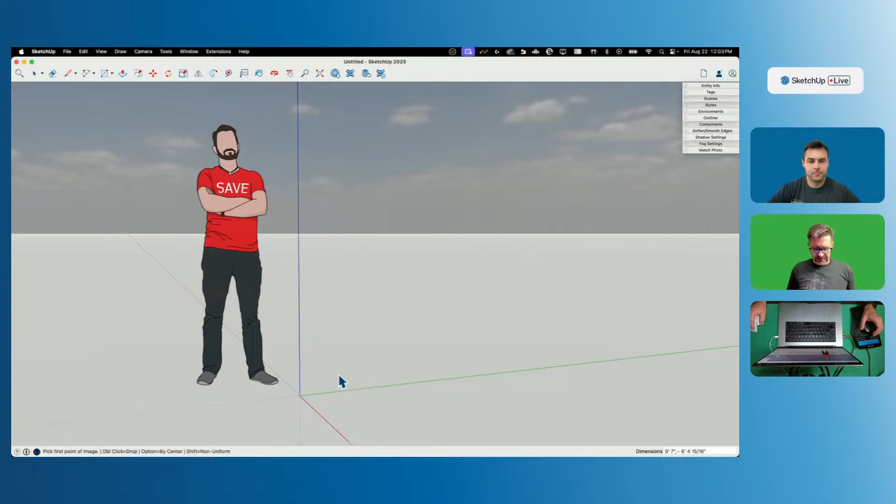All right, here we are. I grabbed a couple of images of this that I think we're going to try to use. Let me drop one of these in here on the screen so we can take a look at it together. This is the building we're talking about. You can see why it was so exciting to go, oh yeah, let's model that thing.

We've got these big—I don't know if they're timber arches kind of coming up here. We've got stonework that goes over here, these big multi-laminated members here. It's just a really cool structure, really unique, really just begs to be in SketchUp in my opinion. It just wants to be modeled.

Normally the sky isn't this white in Nebraska—just so everybody knows, this is the result of Aaron's environment that he has on, but we can turn this off temporarily. There we go, that looks more like it.

This is interesting because normally we would look at this from an elevation perspective or maybe even a section and try to figure out how we're going to trace this. But because we don't have any of those things, we're kind of flying blind here.

And so I'm wondering, Aaron, how are you going to approach this? Are you going to do a basic shape first, or what's your thought?

Yeah, so there's a couple things we could do. We could jump in without thinking, which is a tactic I'm a fan of. But I think we might pump the brakes for just half a second.

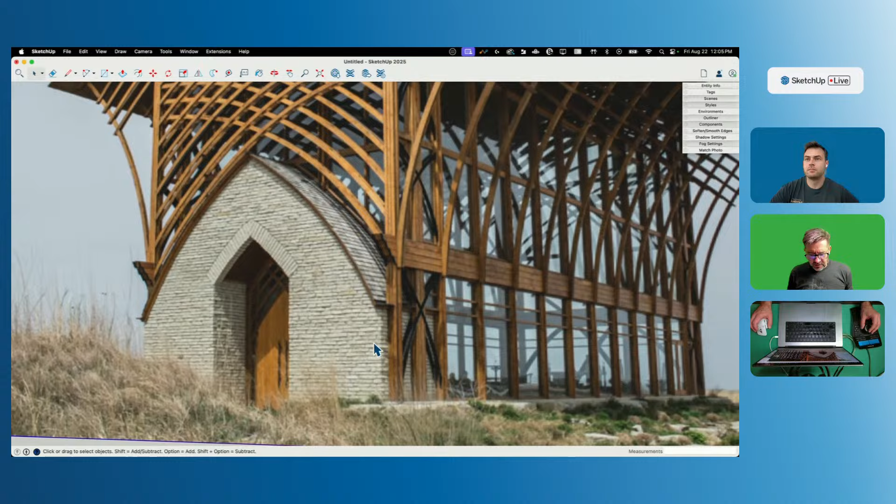So I think what could happen—and we end up skipping out on this step a lot because we don't get good images that would work for this—but I think this image may actually be a good one to give a shot at a match photo.

Because I feel like we have parallel vanishing points. If I look at this line right here and this line right here, they're going the same direction toward each other. Over here, I don't have distinct lines, but I could pull a line from this point at the end of the overhang to this end of the overhang, and then from here over to here, and that would give me two points going the other direction.

So I think I could do a match photo with this. I probably wouldn't do a whole lot of actual modeling in the match photo, but I think I could do enough to get, like I said, this initial box right here.

So here's the side, kind of goes like that, goes like that, goes like that. To get that in there, maybe reference where this part is. So I could do enough that we get the approximate shapes and relative values right away.

So I'm going to give that a shot, we're going to try it. Yeah, match photo is a good call.

And I have the basic dimensions listed out here for you, so as soon as you have a shape you feel comfortable with, we can get everything to an appropriate size. Perfect. Yeah, so we'll talk through what that process is like right now.

So I'm going to go to import. I believe it is this one right here. I'm going to import it as a new match photo. Hit import. This is what match photo gives me. Whoops.

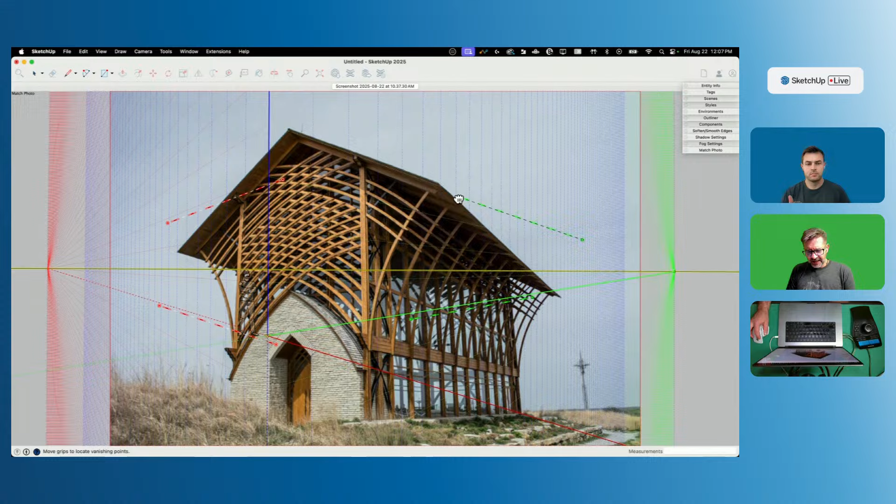So I'm going to take my greens and line them up with one set of parallel lines that vanish, so like that. And I'll grab the other one right here, we'll go right at the bottom of this beam right here.

There you go. One thing that's nice about this photo is it looks like it's just a pure photo that's been taken straight on from this thing. It doesn't look like there's any type of warping happening, which is nice because it kind of lets you trust the match photo a little bit more, I think.

I think you're absolutely right. It's one of the things you see especially with tall buildings, because tall buildings don't fit into viewfinders very well—they're just not made for that, they're big. So a lot of times when you look at skyscrapers, either because of the lens they use or post-processing, we don't have good solid parallel lines. This one, however, worked pretty good.

So I'm going to take my origin now, and drop it right at the bottom of this beam right here, which is where I think that column goes all the way up, and that's where that inside glass is. So by putting my blue line here, I can see does that pretty closely match? And it does—it does a pretty good job of matching up with that vertical line.

I can see right here that 2D Aaron—so a lot of times people ask, why do you have those 2D figures in every model?

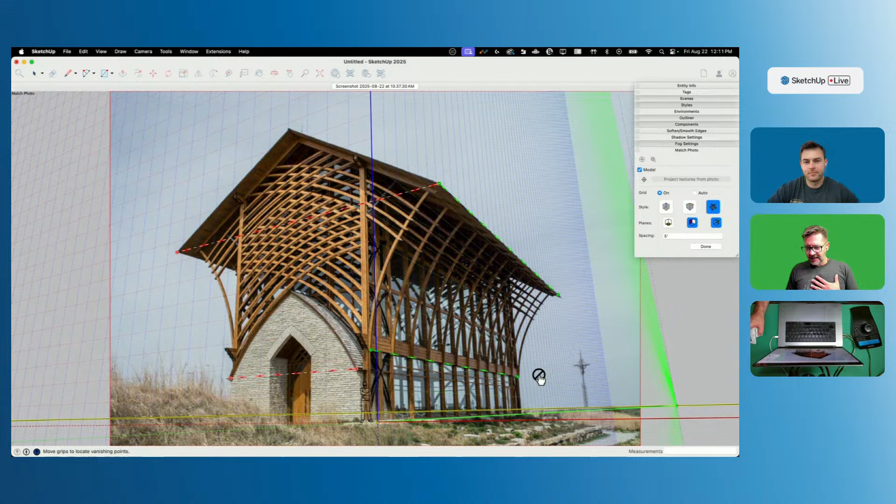Yeah. All right. At this point, I got my lines in, my red lines, my green lines. I'm going to go ahead and hit done. All right, and now we're in here. We have this. And what I'm going to do is start right here at the origin. I'm going to draw a line all the way back to here. And I'm going to take it up to here. I'm going to come across this line. Went a little bit too high, and I'm going to bring it back down. All right, there we go. So I'm going to grab that, move it vertically, just a little bit.

Try to line it with, I have this little teeny line of reflection I can see right here. All right, I'm going to take that straight across the red axis till I get to there. I went too far. All right, but again, I'll fix that. No, actually, let's do this. Let's just pull this through till it hits right there. There's that line and back. So that's about where the bulk of that glass frame is at.

I'm going to do one more thing. I'm going to pull this out on the red axis to this corner right here. I'm going to go straight up from there to here, take that across to here, drop that back down to the origin. That gives me a rectangle. Let's go here straight up. Arc from here to here.

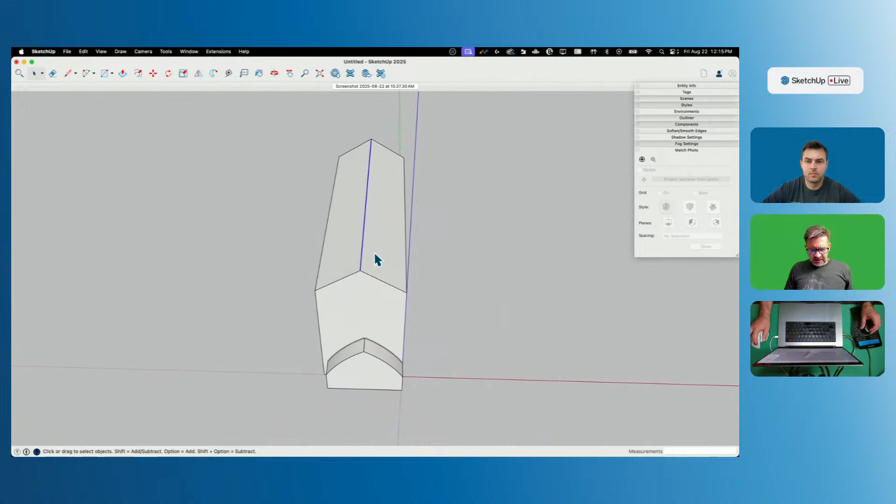So what I can do is I can pre-select. I can highlight right now, and when it's highlighted, jump back into the scene. And now I can just go to move and move it vertically, even though I can't see where it is. And that works just perfectly. All right, so it looks like that is parallel right there. That looks pretty good. I'm going to triple click that and make that into a new group right now. Nice. So this thing, I should probably save, huh? Yeah, I think so. Save.

John Ross asks, are you going to do half the building? So I'm thinking maybe modeling half the size and then just flip the half of the building and then flip a component over to the other side? Or are you going to model the individual trusses and then array them? What's your approach here? That is an excellent question. Something I don't think about usually till I'm pretty far down the line of modeling. So good question. Thank you so much.

So obviously right here we have these continuous pieces that come across, and you can see the left and right is different because of the way the timbers overlap. So this facade I'll probably do by itself. These pieces down here as they array and the beams that go in front of the glass, I'll probably do that as a component and then copy it over. And then the back half is totally different from the front. So I'll probably model the front as a piece and then the side as a piece and then mirror the side over.

That is a great way to be thinking about stuff like this. If these all melded together, if they weren't obviously one set in front of the other, if these all just came together, then I would say, yeah, let's chop it right down the middle and do half of it. That's a good astute point. Are you ready for some dimensions? Almost. I want to fix this real quick first.

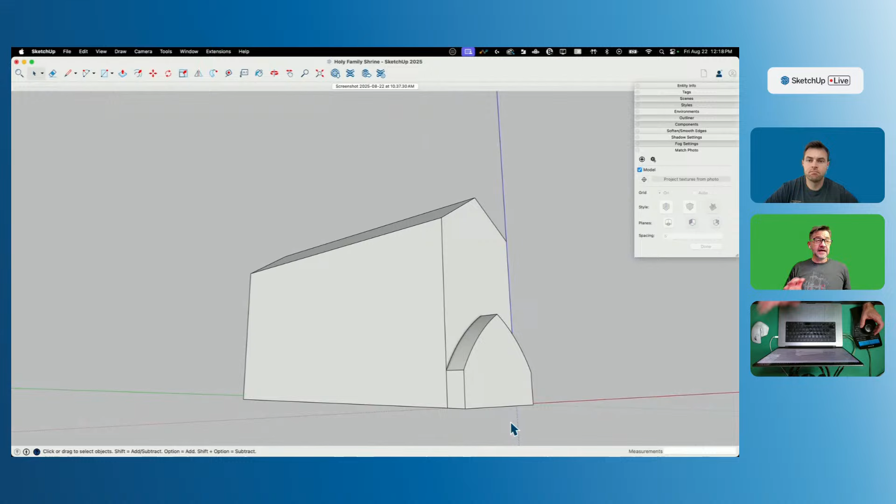If I come over here though, see how it looks like it's slightly off? So I think what I can do is I can double click in and I can pull this back and get close to what I need there. Again, we're not trying to match perfectly. We're just trying to get the general shapes in, and I think that gets me close to where I want to be with that. All right, yes.

So now we're, wait a minute, hold on. Okay, now that's important because we're going to do some scaling now. I want to see how this changes. Yep. So what I'm going to do is I'm going to grab the two pieces that I have, put them into a new group, go into that group, and we'll scale from here.

All right, so what numbers do we have, Justin? Okay, so for the width, we are looking at 26 feet. All right, so let's try this. We'll see how close we are. 28.5. All right. So I'm going to just do a dimension from here to here. Tell it it's 26 feet. Enter. Because I'm inside of a group, it's just going to scale the group and not the whole model.

If the whole model got scaled down, then Aaron would shrink and it would be absolutely terrible. So I'm just going to hit yes. There we go. Cool. So let's see. So we're close there, but yeah. But okay, the screenshot no longer matters at this point. It's just reference. Yeah, now we're flying wild.

The length is 80 feet. 77. Oh wait, no, hold up. 81 and 1/4. That's pretty close. So I'll come in here. I'll just push-pull this back right there.

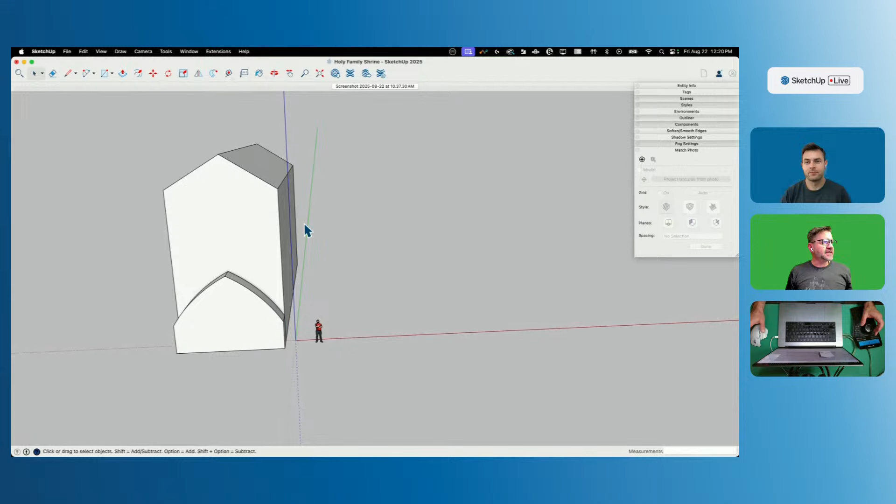So yeah, Johnny pointed out that we could go in and adjust the match photo to make it all line up perfect, and we could do that. I'm not gonna. I absolutely could, but there's not a whole lot more I want to pull off the match photo at this point. At this point, I want to grab a couple more images I have and bring them in here and use these to model from.

So we're gonna use this in a couple different ways. I got this one right here, and this one right here, which are good front and side views that I think I can model off of. So this one right here is perfect for getting these wood shapes that are gonna repeat the whole way down. So if I get this arc and these pieces right here, that's gonna be all the way down the side of this model. This of course is that very decorative front end.

And then here on the sides, we can see what pieces are here to repeat. Yeah, so that'll be good to get all that stuff in from these images right here. So like I said, a little less worried at this point about the match photo that we started from.

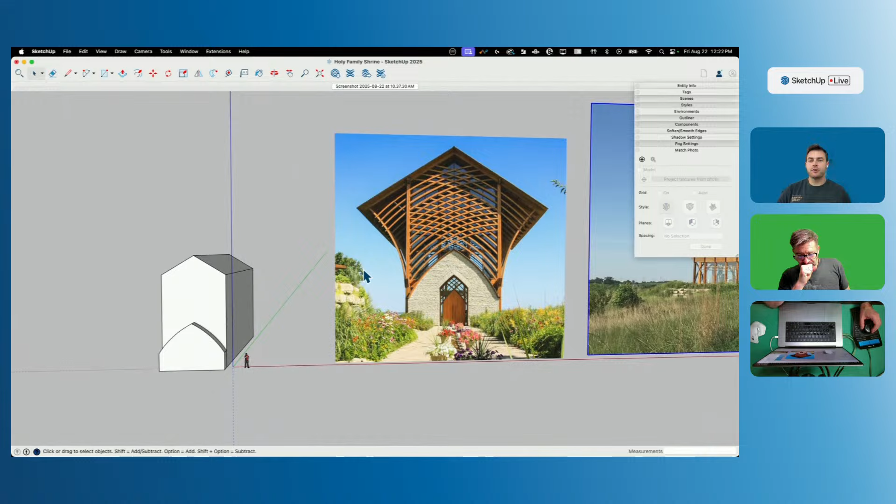And are you going to wing those arcs, or are you going to trace the photo? Well, see, here's the thing. We established that arc through the match photo with this, because these arcs offset off of this roof we did right here. So this is actually that same arc, offset, offset, offset, etc.

The question that I have right now that we need to figure out is how far apart are these things? So there's a couple ways I could go about figuring that out. One is I could scale this drawing to this size and then just start doing it. I could offset 13 times, and then scale those 13 lines so the last one comes right about here.

Or, since I have this nice, clean, square front view, I could take this and put this onto the front of this mass that I have right now and work off of that. So I think I'm going to try that. I don't know if it's going to work, but I like to try different ways to do stuff for you guys. So we're going to give that a shot.

So right now this is an image, so I can't paste an image onto a surface. What I have to do is right click and say explode. When you explode an image, you create a surface with a material on it. That material is that image. So that's what I got now. So now I can come in here and I can say paint bucket, grab this, put it right here.

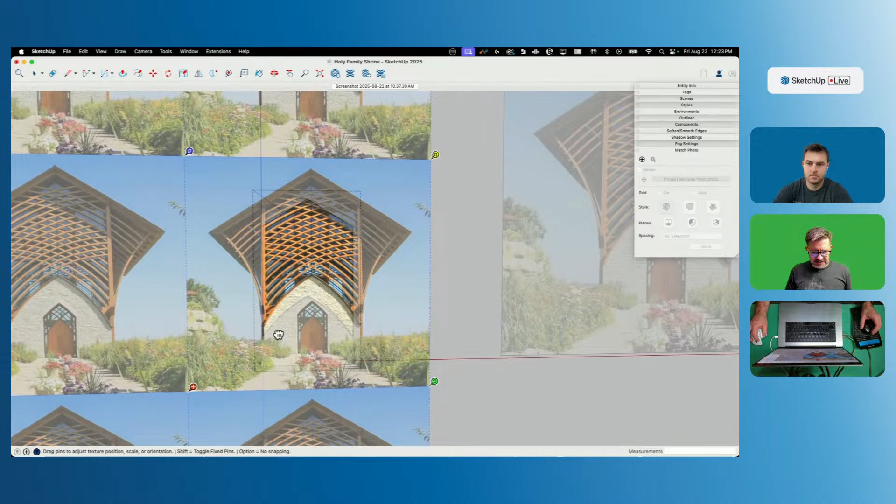And then I can say, okay, now texture, position. And I don't want to distort this at all. I just want to make it smaller. So I'm just going to start dragging it like this, slide over. This is not precision modeling at this point. This is kind of just getting stuff where I need it to be so I can reference it. So if I slide that, that's pretty close. A little bit bigger. Yeah, that looks great. All right.

All right, so this picture is not perfectly square. I'm seeing some distortion because I'm taking this line and trying to line it straight up, and that's working, but I can see that that's not perfectly aligned down here, but that's okay. This is gonna get us close. So I'm gonna go ahead and hit enter. Now, again, this is temporary. This is just to get some geometry off of here. We're not gonna keep this here. These ribs actually sit out away from that front glass right here, you can see. So I'm just using this as reference.

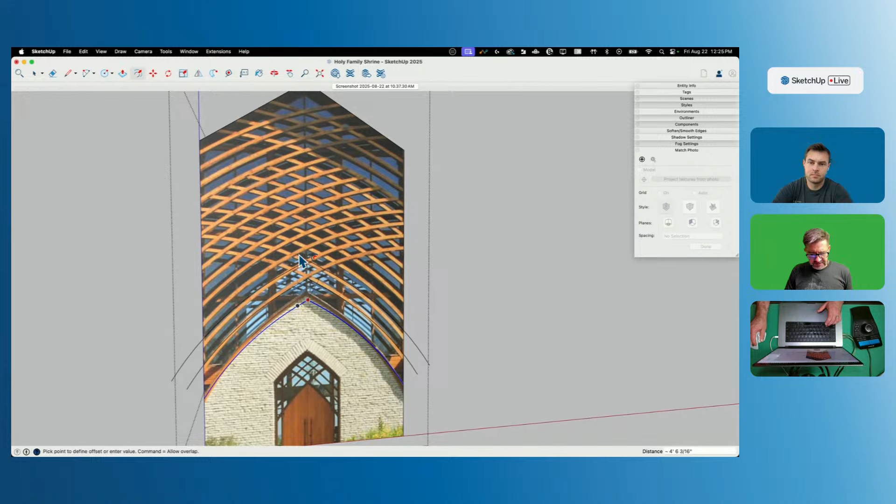So I'm going to use offset. Actually, I got to go in here and get this. I'm going to grab this line right here. Actually, I wonder if I should do both. I'll grab both these lines. I will copy them, and then I'll come in here into context, and I'm going to hide everything else in the model, and edit, paste in place. Now I can say, oops, offset from here to here, from here to here. Yeah, I see that the distortion's bugging me already. I'm going to say 12x.

Oops. Offset from here to here, 12x. Oh, I'm sorry, asterisk 12. All right. Undo, undo, undo. All right, grab these two. We're going to try again. Offset here, 12, asterisk, enter. Asterisk 12? What am I doing wrong? All right. Times 12. X12. Nope. Oh boy. It's all falling apart. Why am I having such a hard time here? All right, let's try this again. So I'm going to grab these two. Sometimes Fridays feel like Mondays.

All right, I'm going to offset just this up to here. This first one looks like it might be a little bit different spacing. So then I'm going to grab this one. Offset that up to here. 12x. Enter. I don't know that you can array an offset. I think your better move is just to use the move. Double click. Oh. Yeah. Yep. Yeah. There you go. Brain didn't do its thing it was supposed to do. 1, 2, 3, 4, 5, 6, 7, 8, 9, 10, 11, 12, 13. Okay.

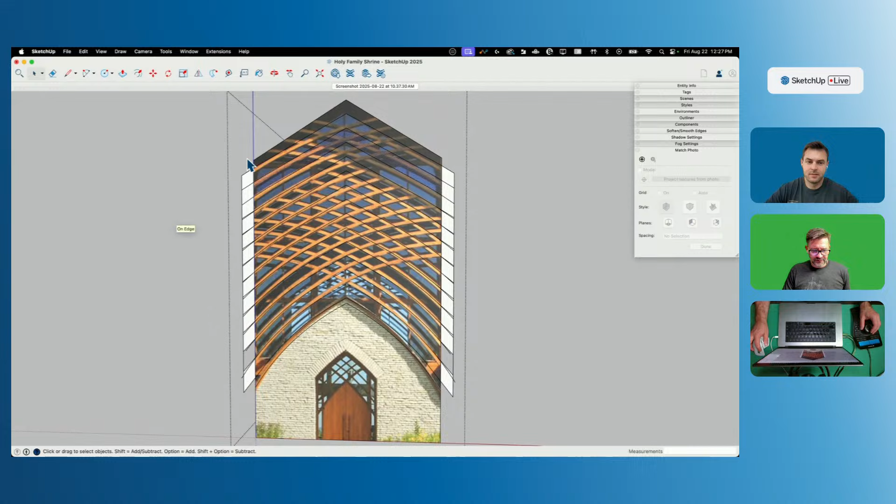Nice. See that, folks? Even the experts. By that I mean Justin. Forgot to tell me that. I'm not the expert. We've got the first pun of the day here. Peter says, right, "These arcs are way over your head," at Aaron. All right. And now, judging on the location of your scale figure, I'd say that's true. Yes. This is good stuff right here.

All right. So I may want to reference this image again, but I got to get it out of the way because there's too many lines right now. So I'm going to go up here to View, and I'm going to go to Face Style, and I'm going to change to Monochrome. Monochrome doesn't remove that, so it's still in there. What is this? What is going on here? Hold on, I got to go back. I guess, yeah, it's tough again because the photo that you're using in elevation is a little distorted. It is. All right, so here I'm going to back up way up. I'm going to grab these two lines and I'm going to use a move.

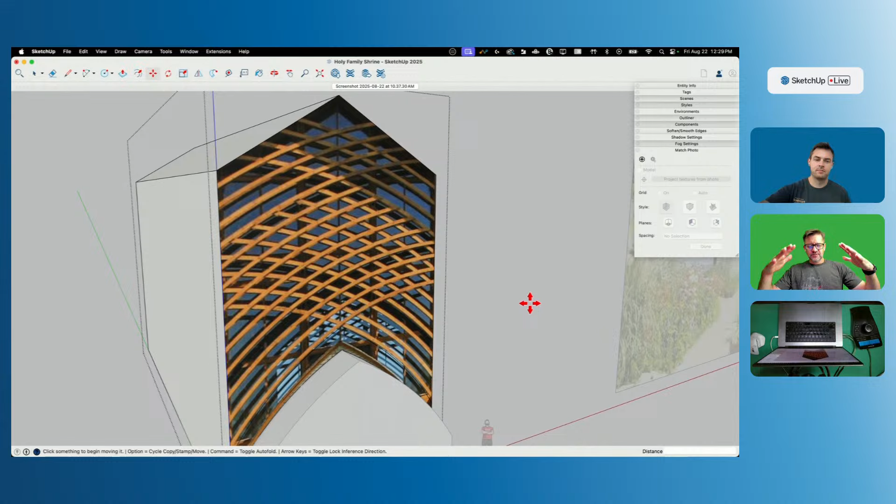Option move up this one, and that's going to say 12x. So I was curious about this. So you can see that I can't use a move because, oops, that's not what I want to do. Because it does actually grow. So the arc of this piece is different from the arc of this piece. Is that a true statement? I'm questioning how I'm doing things. So apologize for 1 second. Indulge me for a moment, if you will.

Here's what I want to try to do. All right, so I need to turn back to monochrome. So if I take this line, I'm going to grab an arc, and I want to continue that line out. There we go. So that's tangent. So if I take these two lines, weld them. Now if I go back, I think I want to grab this and put it into a group.

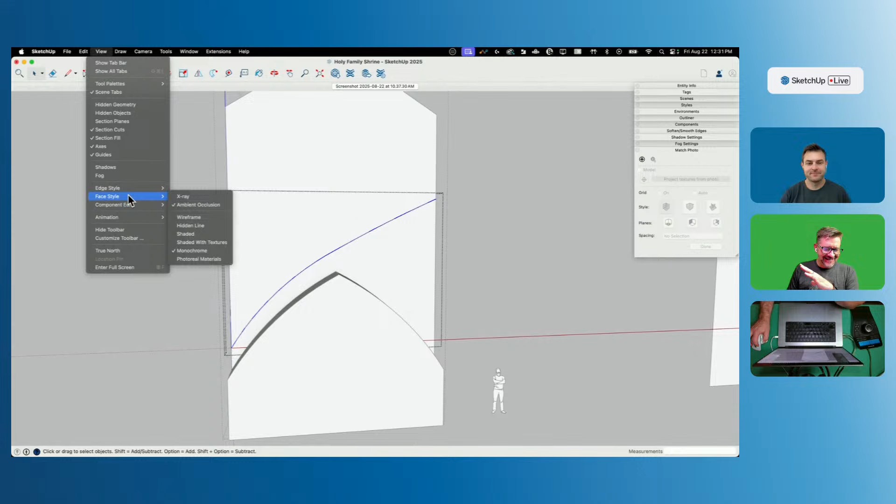I feel like this arc is really throwing you for a loop here. Well, I got to figure it out once, and then I'm good to go. Right. It's crucial though, the point of the whole stream. This arc. No, I think we're there now. I think now that I got to this point, I had to do that for a sec. Okay, so that arc's not quite right. So I'm gonna go ahead and get rid of the arc from here on over. Would you consider just drawing the arc from scratch?

Yeah, so I'm gonna just come here and then pull that up to about where I think that should be, and then we'll grab all of that and say weld. And now I'm going to take that and offset that here. I can double click. Okay, this is way better than what we had before. Nice. We're closer. Again, still some distortion, which makes sense because if you think about being down looking up like this, stuff that's farther away is going to look like it's closer together than it actually is.

So that makes sense. So 1, 2, 3, 4, 5, 6, 7, 8, 9, 10, 11, 12. So one more. It was a little bit too tall. So since these are all in a group together, I can grab them all and scale them down just a skosh like that. This way just a teeny bit.

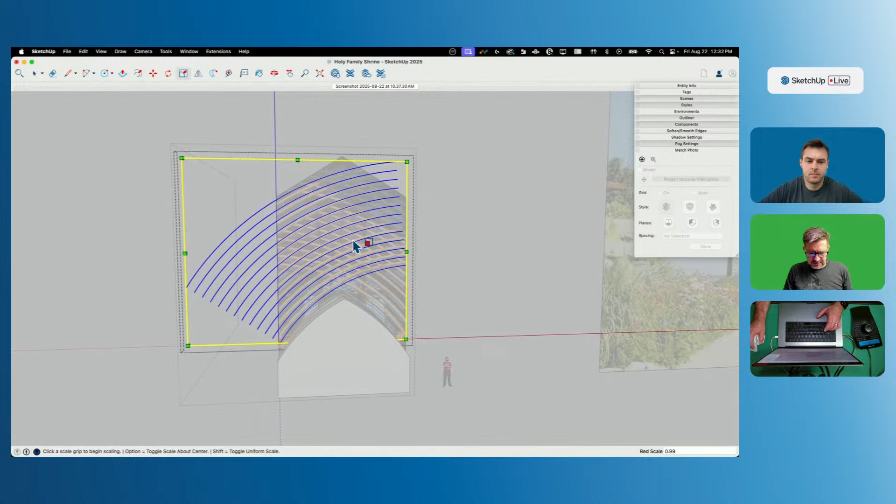So I do have to... Some of these ended up a little bit short, which I think is not a problem because I should be able to just go to arc, grab the end here like this, and then, oh, whoops, I'm out of context. All right, there we go. I go here and I carry that out like that. Nice. Fortunately, it is repetitive.

But yeah. You know, this type of modeling, sometimes the repetitive stuff, it's good for the soul. Well, it's reality, right? Sooner or later, stuff repeats, and you maybe don't have the exact tool you need to make it happen. Right. Oh, I'm still going now. Stop! For gosh sakes. Okay.

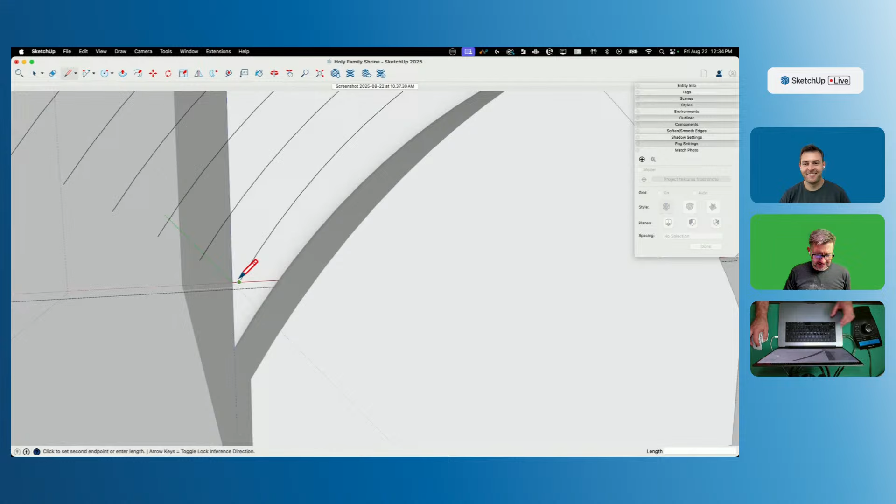Looks like the bottom one doesn't go all the way through on the left. You're right. This is so small. I'm just going to put a segment like that. There we go. And we'll weld that. And then each of these just double click or triple click, weld. Actually, I think I can do this all at once. If I just grab all of that and right click and say weld, is that going to just do the first one or all of them? Let's see. There you go. It did all of them. Cool. Time saver.

All right. Almost there. The last thing I need to do is give them some depth. So again, one at a time, I'm going to offset, I'm going to say 4 inches. And then I'm just going to double click and do that to each of these real quick. Is there a group offset? Is there an extension that'll let me offset a bunch of edges? Oh, whoops. Oh no. Let's see.

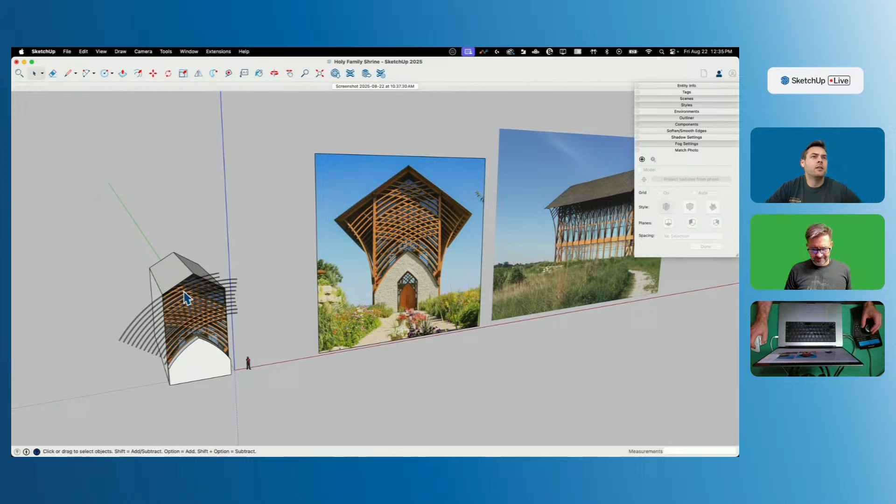It does look like maybe there's an extension called multiple offsets. That would be interesting to play around with. Yeah.

All right, so now I need to get these cleaned up. This is still in its own group, so I'm going to come in here, chop these, and get rid of this extra geometry.

Okay, I don't know what I just did before. Get rid of these. Sometimes problems happen and you can investigate, or you can just go, all right, I ended up in the right place, so let's move on. Why didn't that cut that? It's cutting a few each time. I must just be slightly out of plane, maybe. I don't know what that was. That wasn't good.

You're close, almost there. What is going on? Okay, there we go. These ones over here, the top 1, 2, 3, 4 carry on, so I want to skip 1, 2, 3, 4. Start my edge here, that, and then...

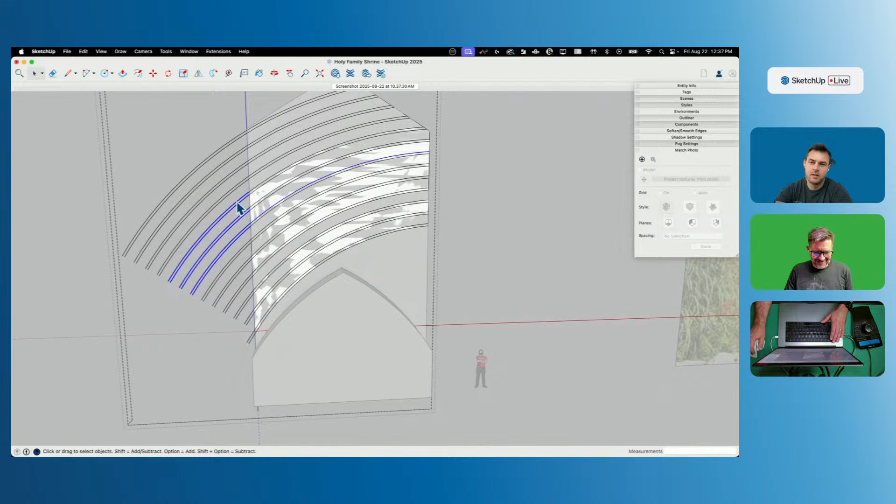I don't know what's happening. Oh, Aaron. Some things should be easy, and I don't know, man. Oh, it's a good time. It's a good time, if nothing else.

Don't worry, folks, next week we'll go back to modeling spaceships. Yeah, this geometry, this building is just too hard. I need some simple 3D curves and mesh to mess with.

All right, let's get rid of some of these surfaces. Oops. Woo! All right, we're here. We've made it here. This is a good spot to be. I like that we're here. All right.

Now, oh, I should close these up too. Sorry, let me come back in here. That one, ooh, it turned white. That is a good sign, that means something's closing up, and I like that. All right, let's hide the rest of the model and see. All right, looks pretty good. We can get rid of some extra edges here. Whoops.

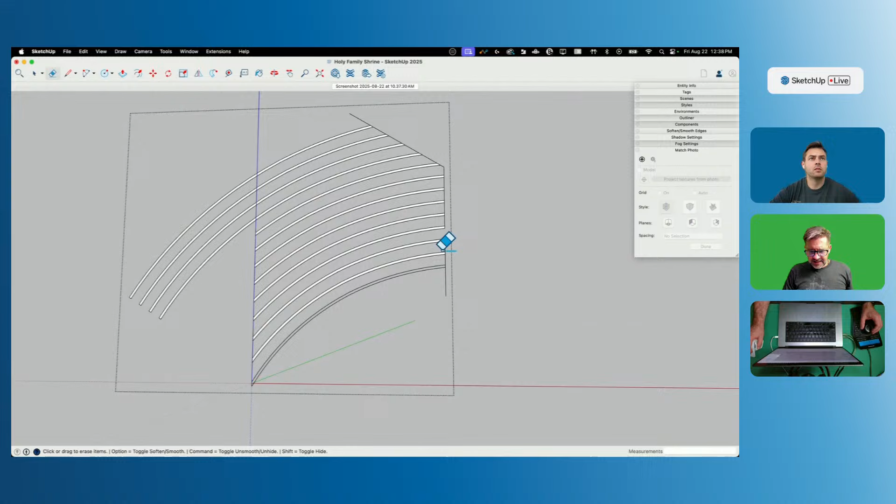Okay, so let's say, hypothetically, a learning opportunity presents itself. Oh, there's my problem here. This one wasn't quite long enough. How about that? There we go.

I hit this every once in a while, where I have an edge drawn on the blue axis, and because the blue axis is so dark, I can't tell where I have edges and where I don't. I don't want to necessarily move my model away from the axes, so what I could do is temporarily just move the axes over. So I can go to Tools, Axes, and put it right here. And then now I can see, okay, there's those segments I missed, couldn't see them before. You can also temporarily just turn off the axes in your styles.

And then I can right click and say reset. Oh, and I went back over there. All right, so that's pretty good.

That's looking good. Before I extrude it out in 3D, you do notice that these ones coming this way stop at this one right here, the first one that goes on the overhang the other side. So what I'm going to do is take this and make it into a component.

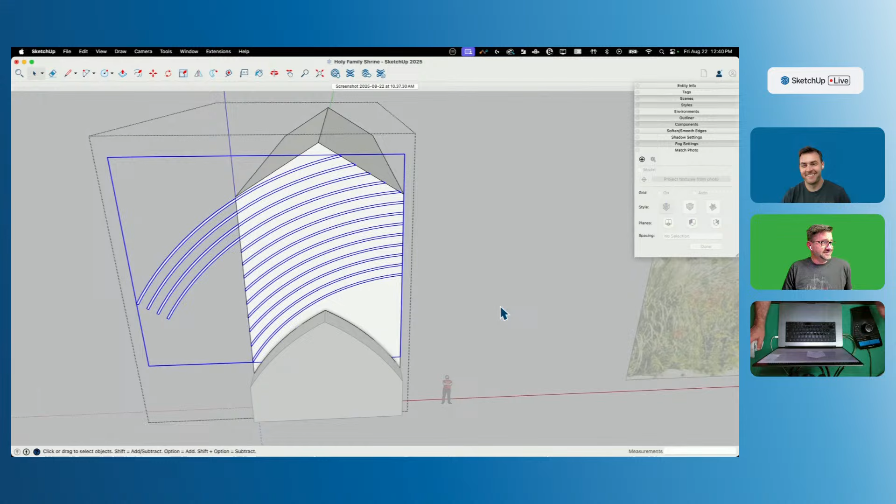I'm going to call these the front ribs. Because, yeah, right, why not? I'm going to take that, and I'm going to mirror a copy along this ridge right here. All right, so there we go.

Looks good. Now what I want to do is, let's see how best to do this. Here's what I'm going to do. I'm going to come in here, grab this edge right here, and copy it. Now I'm going to come into this one. I need to change my view because I don't want to see both of these, so I'm going to hide similar components. I'm going to say edit, paste in place. All right, now that should allow me to get rid of these pieces here on down.

Nice. It's all just geometry. Because in this case I made it a component.

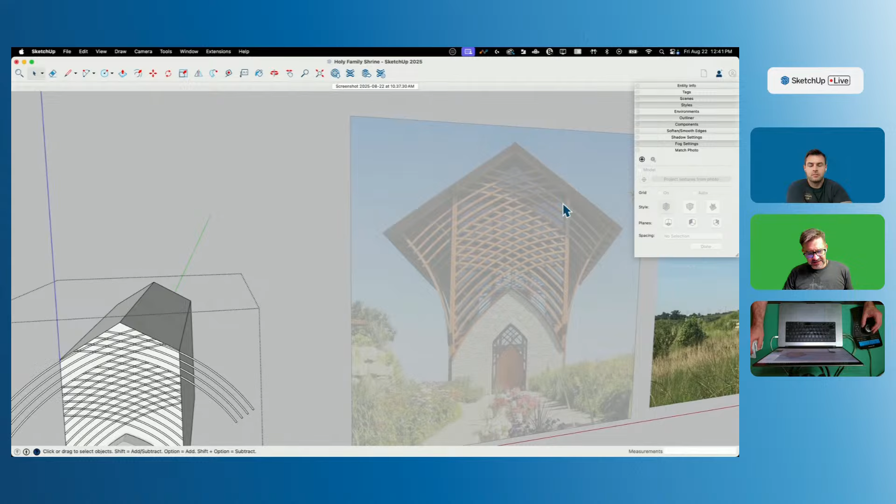That's a good one. Nice, that's looking pretty sweet. Yeah, I'm a little closer on the top here, but I feel like I want a bigger thing here, but I'm going to go with it.

All right, so now what I'm going to do is come in here and pull this piece out. I'm going to make it 4 inches. I don't know if it's square or not, but I'm going to say it is 4 inches. I'm going to double click each of these. This is someplace where joint push pull might help because I could grab all these and do them all at once, but really it's not that big a deal to just click through.

It's good for the soul, you know? Sometimes you just need something to turn your mind off and just double click, click and double click. There we go. All right, so there we go.

Got that. And now this one, we will move forward this way 4 inches. That'll give us our overlap. All right, we got that going.

That looks like it's about halfway back - well, about a third of the way back above this. I'm surprised that before push-pulling, you didn't want to draw that outside arc when everything was flat, the one that intersects the outward top arc. Oh, this one right here? Yeah, that would have been a smart thing to do.

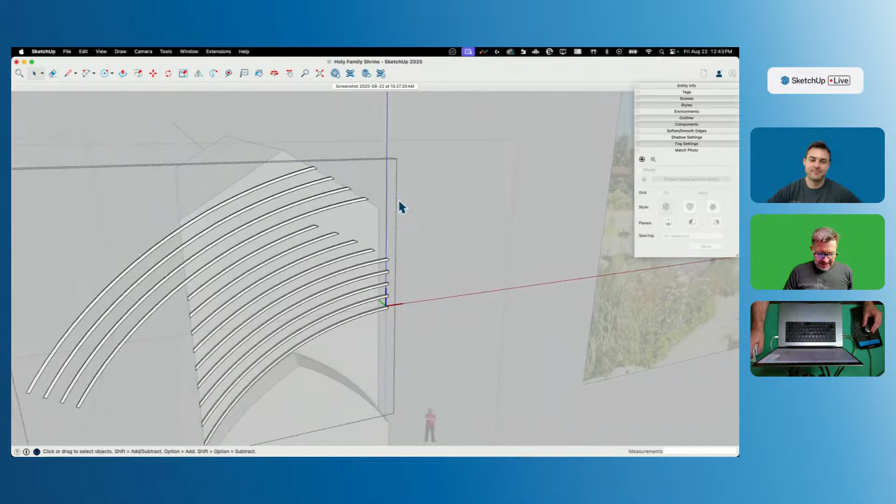Yeah, okay. Control Z, Control Z, Control Z. No, just kidding. We have tools for this. We can fix it. We can do this. We can make it all happen. Look at all this.

My messes are showing up, but that looks pretty cool. So what we have right here, a couple things: we have this big beam that comes in that covers up a portion of this, so I'm gonna do that real quick. Come out here, only 12.

And that's gonna go straight up. I'm just gonna run it long right now. Make a component and call this a side column, rib number 2.

Oh, so many ribs. We'll just take this back like 6 inches, 5 inches. Actually, no, I do want that, because it looks like that first beam is just a little ways back, so I want to make sure I make that happen. Now that I'm looking at this too, I think that'll work. That'll work.

Nice, take those guys back. I want to line them up so this corner lines up with the middle of this piece right here, that way both sides will bury into it. Perfect. I'll take this piece and mirror it.

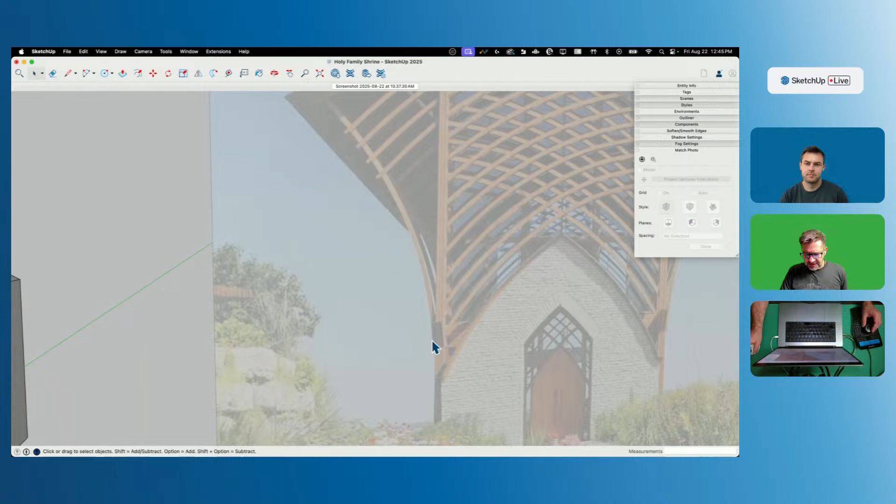I have those pieces. Now coming off of that piece, you can see that's this 3-ply thing right here. Coming off of that, this is where we had that other arc going up. Now, how do we get that exactly where it needs to be?

Thank you for asking. I think what we want to do is reapply this texture here, position that, then shrink it down so that it more or less fits here.

Sweet, nice, just a teeny bit bigger. Now, one of the problems we run into when we do this is it only projects onto the surface that we actually have. But one of the things we can do is make this face bigger, so we can go like this, apply this, and then we get a continuation so we have an idea of where that actually sits.

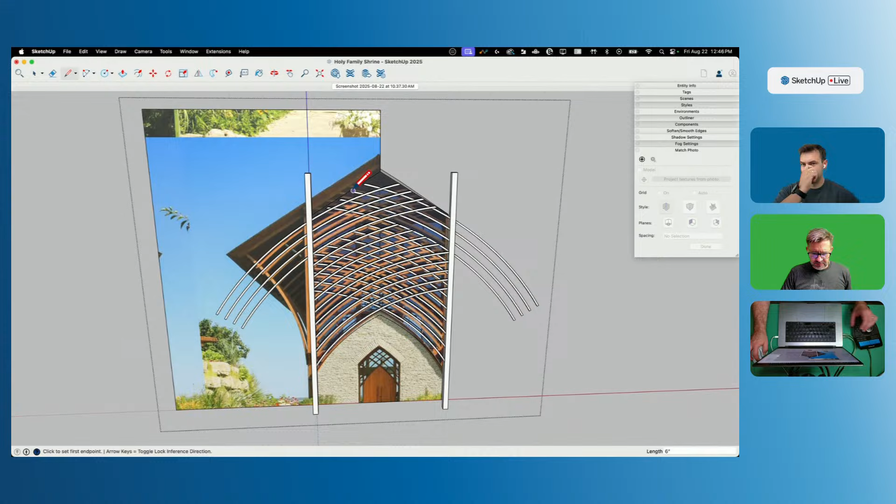So I'm going to do this - go up a couple inches here, give that a little bit of depth, come down parallel here, run out to about where that roof line ends, come down there 6 inches.

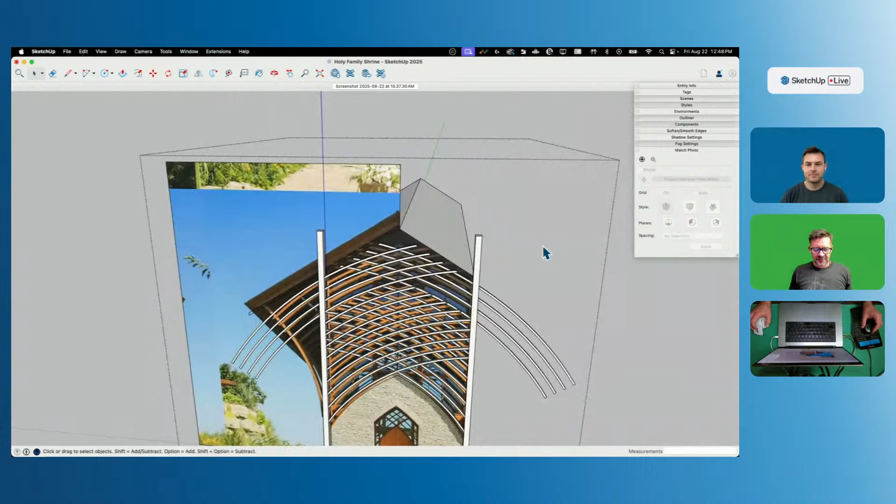Yeah, soothing on the eyes, less twitchy overall. That's right. The other thing is I have this mouse available to do whatever I want with. So while I'm changing my views, I could go collapse this and grab my next tool, and be ready when I come back. It's practice - you definitely get hit by thinking 'I tried that, it took so long, it was so hard to do.' And I get it, I apologize if I make it look so easy. No, but it's so easy.

I'm actually impressed that you've trained your brain to do two things at once. That's like writing from left and right at the same time. It's not easy, man. We have a real Da Vinci on our hands here. Whoa, slow down now.

But yeah, it is a matter of practice. Once you get used to it, you can really speed up your design workflow. I think this is one of the things that has made me a quicker and better designer, and also for presentations, things like this where we jump around in 3D, having these nice smooth camera moves is much nicer than being real jumpy. So absolutely worth checking out if you're a full-time designer, full-time SketchUp user. I would credit it with making myself a better designer. So try it.

All right, so there we go. Now if I get rid of this, and this, I have a couple pieces left.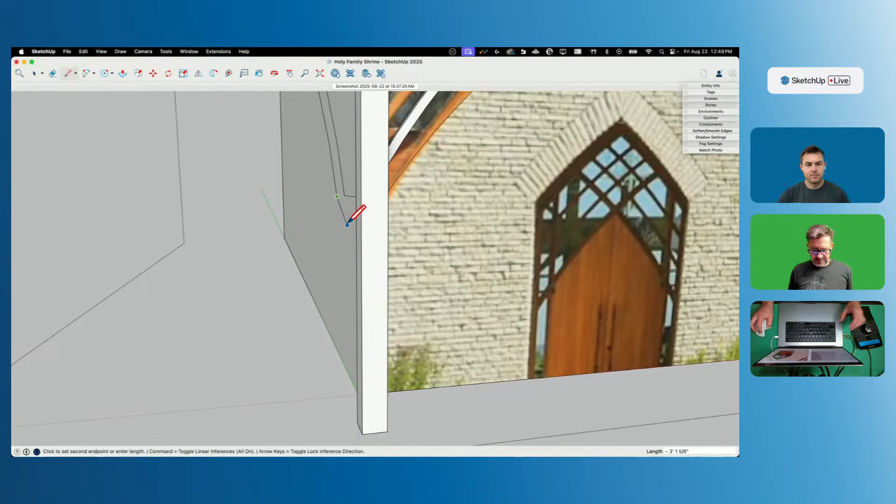John Ross asks, Aaron, can you play the drums as well? Seems like it would be right up your alley. Maybe play the drums with one hand and the guitar with the other, multiple instruments at the same time. I've tried playing drums, I can't do it, it's too much for my brain. I was in and out of bands throughout most of high school, but the drums were always a mystery to me. My brother's a drummer, he plays drums, but I could never pick it up. I tried, couldn't do it.

So you're saying you were the lead singer? Nope, I played bass mostly, which was a lot of fun and, dare I say it, easier than most other instruments, in my opinion, my personal opinion.

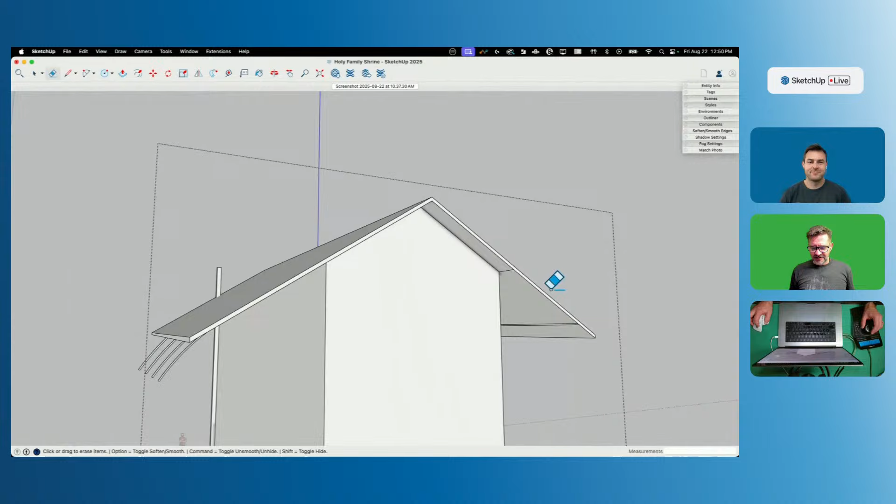Mark on LinkedIn, another tech question for you. Mark asks, what brand and what specs are your laptop? I have a 2-year-old MacBook 16, most of which is stock. I think the only thing that is beyond a normal MacBook for me is that I've upgraded to 32 gigabytes of RAM.

Yeah, I think that's it, all your torrenting programs on there too, which we won't talk about. But yeah, it's a pretty basic setup. I do use this exclusively for modeling, though, I don't do any rendering or anything like that. So there's definitely spots where if you were doing a lot of rendering you might want to consider a beefier machine, but for what I use it for, this is perfect.

And again, I am a Mac fan when it comes to Mac versus PC. Some people like PC, I like Mac personally, but that's just my own personal opinion. The nice thing is you can model in SketchUp using either, you don't have to pick.

You're looking pretty close to wrapping up this first set here. I think we definitely are getting close. How are you going to clean up the excess on those 4 top arcs?

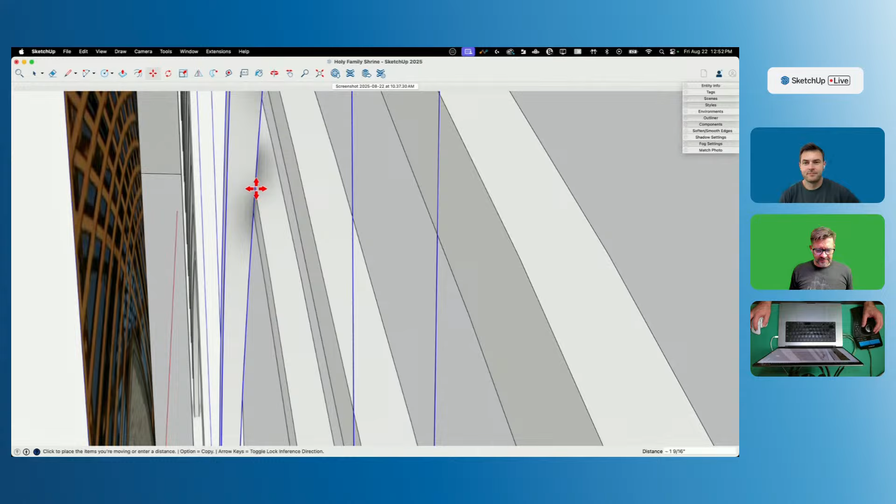Well, I'm gonna have to do a thing right here, because I only have to do this once. That's the nice thing about this. I'm gonna take this one, mirror it again, just mirror it over here. And because these are components, I only have to do this one time.

I'm going to do that specifically by coming in here, grab this edge right here, copy it with Control C. Then I'm going to come into this group right here, edit, paste in place. That's going to give me that. Right now, before I do anything else, I'm going to hit offset and drag that down here, I'll do like 6 inches. Then I can just pull these ends off. There you go, the old school way.

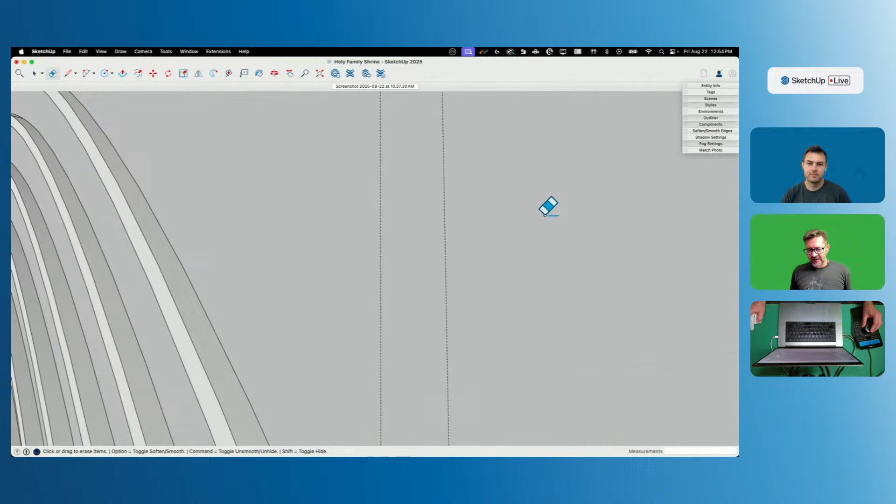All right, are you going to do the same with the columns that are protruding through the roof? Yeah, we should probably do that. With this, actually what I'll probably do is just grab these right here, say intersect face with model, and that should give me too much though.

Still probably easier. Yeah. So the reason I don't use something like solid tools is because what I've got to do is grab both those pieces, get them solid, get them in their own groups, and then bring them together into context so I can hit them against each other. So that was an easy way to trim that off.

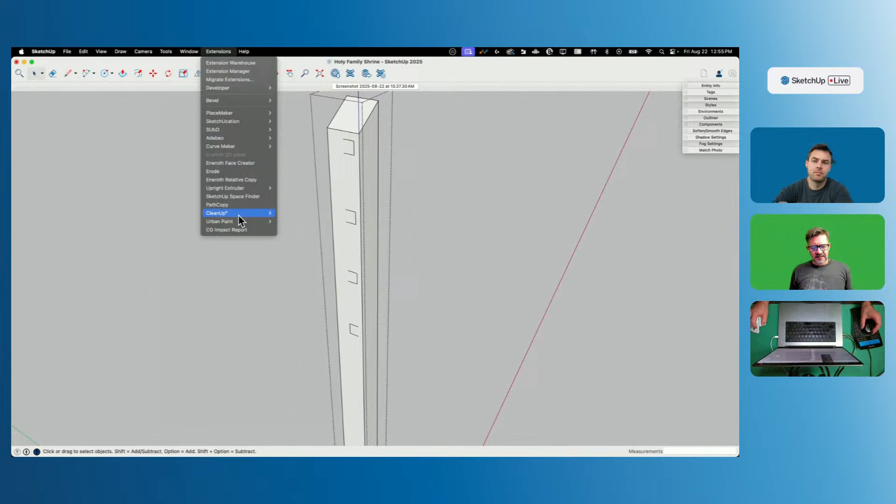I've got some extra edges here, which I don't like. I don't want those extra edges there. But I think rather than going through and erasing, it's going to be as quick to go to extensions, go to cleanup and merge faces. Merge faces is going to break any place that prevented this from being one face, and then I can just go to cleanup and say erase stray edges. And there we go. Now I'm back to just a column.

Yeah, you can also intersect with the model and then just select the one edge, Control C, and just paste in place. Yes. There's a million ways to do this, that's what I love about SketchUp. Everybody kind of has their own way of approaching things, which is why I really love watching Aaron do this, because every time I do, I learn something new.

And that's what I would say about when we have other people who aren't used to modeling get up here and model, and they go, oh, I don't know how to do this. And I'm like, well, sure you do. Just because you do it different from me doesn't mean you don't know what you're doing. So I always enjoy watching other people model on the live stream too. I just think it's a lot of fun. Yeah. Unfortunately, we're only throwing you to the wolves, though. Yeah, that's true.

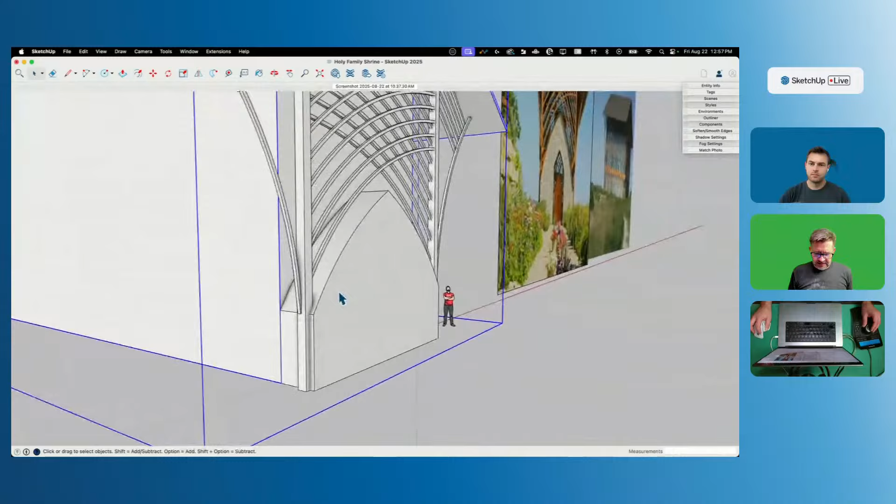All right, I'm gonna make that white again. All right, nice. There we go. Oh, it's looking cool. All right. I should probably group all this together. Grab this and this and this. Make that a group. Nice. And now we'll explode it out of here. And then grab all this, make it its own group. All right, let me do a little work on this guy here. I am letting geometry just overlap. Actually, no, I don't like this. I'm going to come into this and cut that up a little higher.

All right. I'm going to come into this. I'm going to grab that and that. Offset that just to get that roof there. I've been using 4 inches a lot for my offset number. Not for any particular reason, just because I have been. That's the reason why. Cuz is why. It's a nice round number. That's right. Bring that up like that, and I'll grab this.

I could mirror, I could rotate. I've got options again. Right, there we go. Get rid of that. Bring that out to the front, and then a little bit. Let's get rid of that. Let's get rid of it on this side too. We'll pull that out another, I don't know. This didn't look like it went out too far, but we'll try 6 inches and see how that looks.

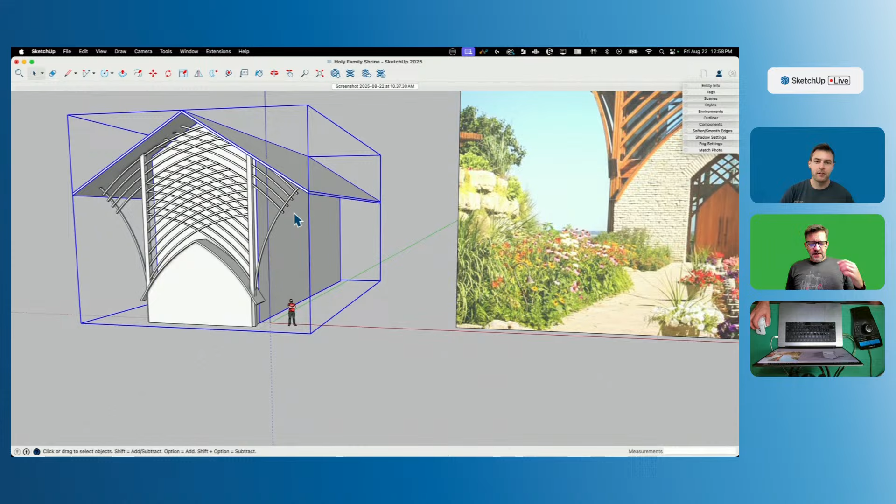John asked, why did you group everything and then explode? I think you were intending to group everything you've been drawing on that one plane and then explode it out of the building group so that everything is separate, right? Right. Initially, all of these pieces were in a group with everything that was this main building. Then I went into that group, grabbed these pieces, made them into a group, then exploded that whole group. So now this is in its own standalone group, and then I regrouped this into its own. So, yes, good catch. Paying attention, keeping me honest.

All right, so now what we've got is this piece right here, essentially, is all glass. Come here. Oh, we're in your favorite part of these streams nowadays. Material time. Adding materials, yeah. It's just so fun. That's going to be all glass. It does cause a little bit of an issue. No, it's not too big an issue. All right, so let's go do some wood.

No, I'm not going to do that. There we go. That looks good. I like that wood. Just enough to fill it in. Nice. There we go. And then we'll do a little roofing up here.

I don't know that I have a picture of what the top of this roof looks like. I'm sure it exists. Oh, no, there you go. Yeah, there you go. Well, obviously, that's asphalt shingles. Like we're looking at a photo of Sasquatch. Like, what are we looking at there? All right, so we got that. We're good. I'm just gonna roll with it. All right.

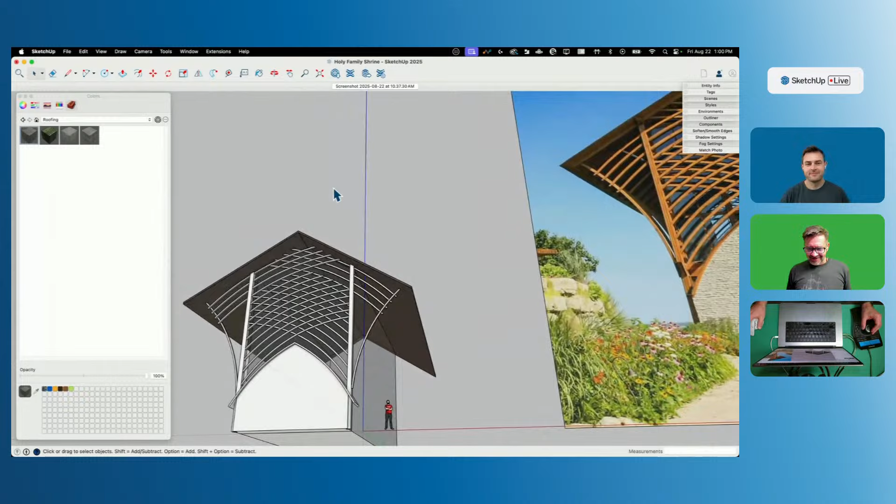Cool. Yeah. So I want that box to just be all glass because I want to come in here and these other pieces that sit around here, I want those to all be just built on the outside as separate chunks. So the first thing I got is I got these monstrous columns at each corner. Based on this being, I think this is 12 inches, those things have to be, yeah, maybe like 2 foot wide. Yeah, they're big, huge. So let's come in here and I'm gonna draw that.

So I'm gonna go this way, 12 inches. I'm gonna come out. What is that, 6? Go this way, 24. I mean, maybe not full 2 foot, but they're big. So let me run this up here for right now. So I'm gonna narrow it down to just a skosh. I'm bringing like 3 inches on each side. And then we're gonna actually have it come into the building 6 inches as well.

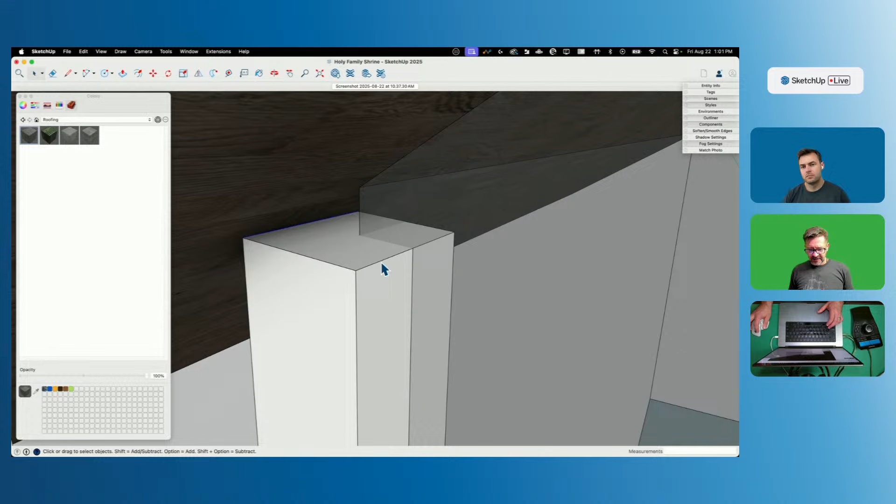So we'll take that, and then at the top, here's what I'm going to do. I'm going to take this down. I'm going to grab this edge, and I'm going to pull it vertical. So I'm going to hit the up arrow, and I'm going to pull it up until it hits the top. Boom. Now I'm going to grab this edge. I don't know why I have this broke. Oh, because the way I drew it. I'm going to grab this edge, and I'm going to move that vertical. Keep it constrained vertical till that little cursor hits the top. Boom.

And now I have that. Perfect. Nice. So now what I want to do is I'm going to grab that, make it a component. I'm going to call it my corner column. There we go. All right. Then I can take that from here. Option copy that up to here. And I'm going to make these components that I need. Just like I said, I'm going to do them on one side. We're going to copy them over to the other, and I'm going to be done at that point.

All right. So we do have a horizontal beam. We have 2. Big one right here that comes out, and then this one right here, almost like a purlin. It looks like another one here. So I'm going to do this big one, and then we'll do some of these small ones. It's hard to tell how far those go up. I should probably get my other picture in here. Hold on. Let me get my original image I was using.

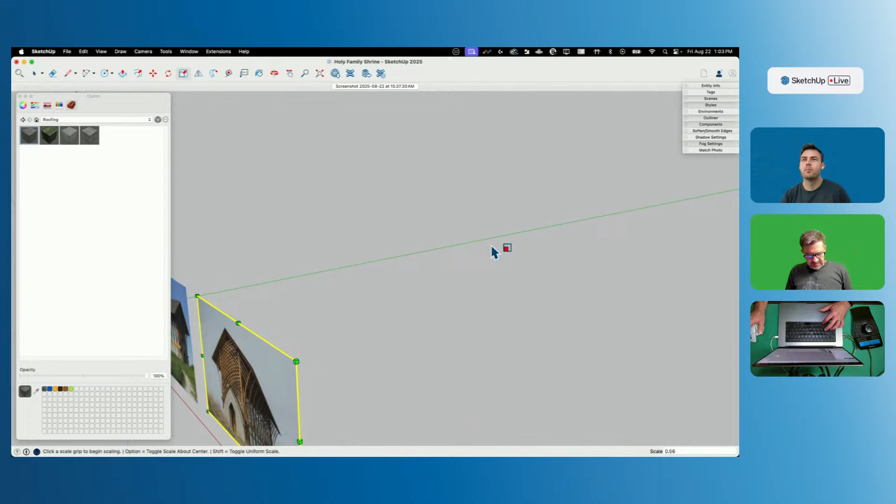Yeah, and while you do that, don't forget to save. Oh, so much saving. Command S. Oh, I don't have my keylogger on. Hold up. But nobody has any idea what's going on anymore because I forgot to do that. Yeah, we can't even see how many times you're Command Z-ing. Yeah. While you get Z-ing, they were talking about Command S, all this awesome saving I'm doing.

True. I do have some history on this building pulled up, and the interesting part about this is the construction. I think I just closed my... I did. Sorry. I was clicking around stuff, and I meant to close this, and I think I closed my modeling window instead. Tell me about this shrine, would you, Justin?

Okay, so it was conceived in 1993. The land was acquired in 95. Construction began in 97. But then in 2000, a severe windstorm basically wiped out the entire construction. And so they had to start from scratch. And then it opened in 2002 finally.

But yeah, Aaron, you're from the Midwest. Can you comment on the windstorms? Where I was from, where I am from, I didn't become from somewhere else.

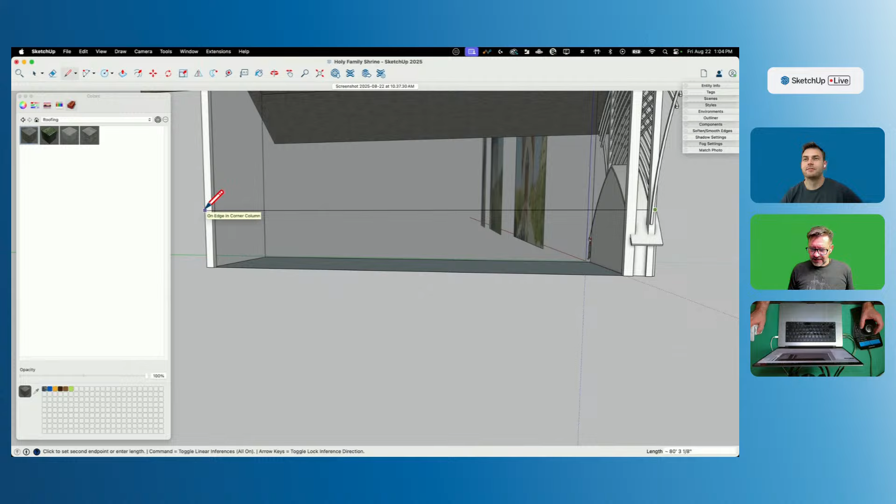Where I'm from, I can't say we had terrible windstorms. So when we moved, like I said, we lived in the suburbs of Chicago, and we moved out to Boulder, Colorado, Longmont, Colorado, and the wind we get coming off of the Front Range, it seems so much worse than anything we had back in Illinois. It's true, some of those plains places, like Kansas and Nebraska. Yeah, wind gets going, it gets rolling. So I believe that. I believe there were storms and they messed with things. I believe that is the real thing. Yes. Checks out.

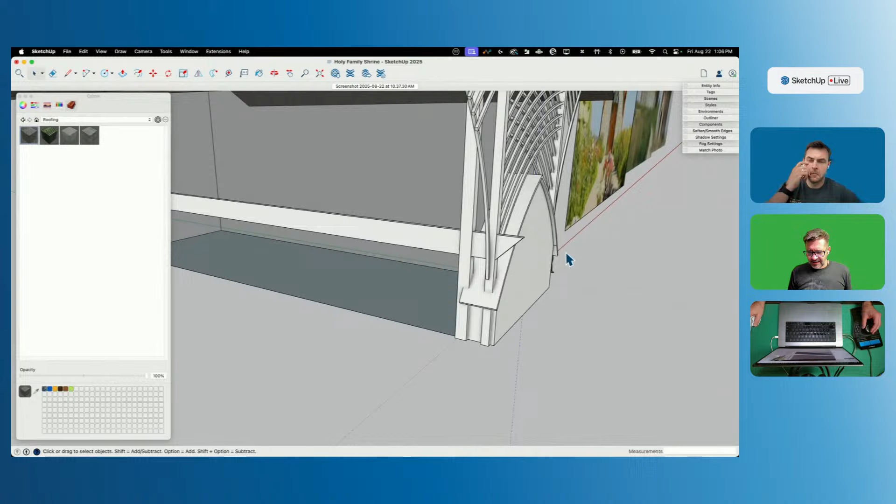All right, so I'm running this beam out here long, and then we'll chop it off like that. Actually, here we'll do this. We'll make it a perfect 45. I'm going to break it right here. You can rotate that edge. 30 degrees? No, 45. I like that. Then you can pull that off. And then there we go. Nice. And I want to take this triangle right here, option copy, or option move. Put that on the other end.

All right. Grab that. Make component. And we'll call this the big beam. Because it's a beam and it's big. That's why. Okay, so I need that same thing going horizontal here. So I have something that's the same size going here. I'm assuming that's front and back. So what I'm going to do, I'm going to take that and from the middle of this beam, rotate a copy.

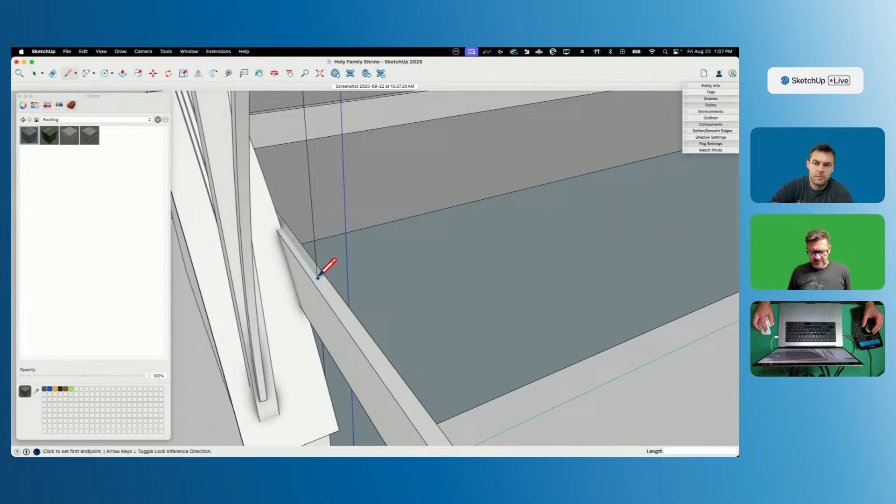Perfect. Now, of course, this doesn't have the end cuts. It doesn't go long like this. So I'm just going to explode it. And we'll cut it right here. And we'll cut it. Oh, I don't have that. Right now, I'll just cut it right here. And then, well, I guess I could cut it in the center. Yeah, let's just do that. Cut here, I'll drop it down the middle there.

John Ross asks, are the beams made of several planks? And yeah, to be fair, looking at the photo, I do think it's like 3 or 4 planks on top of each other. But we are speed modeling here, folks. We're getting it done. That's a great question. And yes, if you look at it, there's definitely lots of layers of wood. I'm assuming these pieces right here are laminate too, but we're just going to give them a wood color and do this. And everything's good. Imagination. That's right.

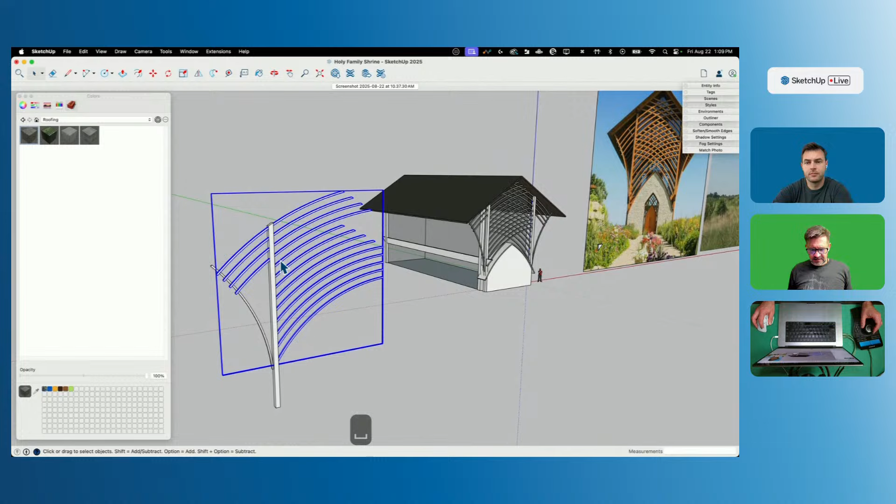Okay. So what I want to do now is I want to grab this and these. I'm going to copy it and I'm going to paste it right here. I forgot to make this a group. Component. So these two can stay. This one right here, I need to make unique. Because this one right here, hold on, I gotta look at something. This one right here, I'm gonna come in here and these ones can all go away, of course. Oops, too much.

And these ones, I will intersect face with model, and I just need... somebody didn't break all the way. Did you just pull it through, maybe? Yeah. Break it, break it, break it. All right. Nice. This can go. Yeah, I'll just get rid of these extra edges here. This probably doesn't matter. That won't get seen. All right, so there we go.

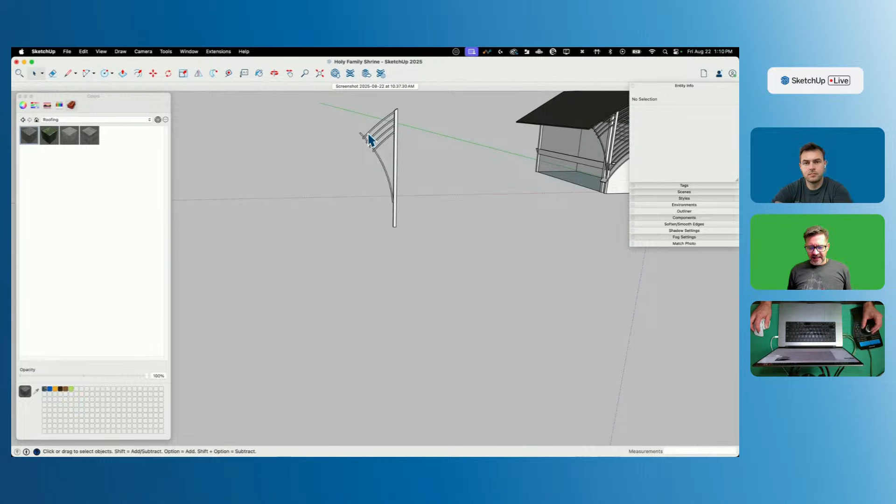So now we got this, and this I'm going to make into a new component. Whoa. New component. I'm going to call this the side rib assembly. Because, yeah. I feel like your naming schemes are spot on. I would love to see your component list. Oh man, we can do that. We could look at that.

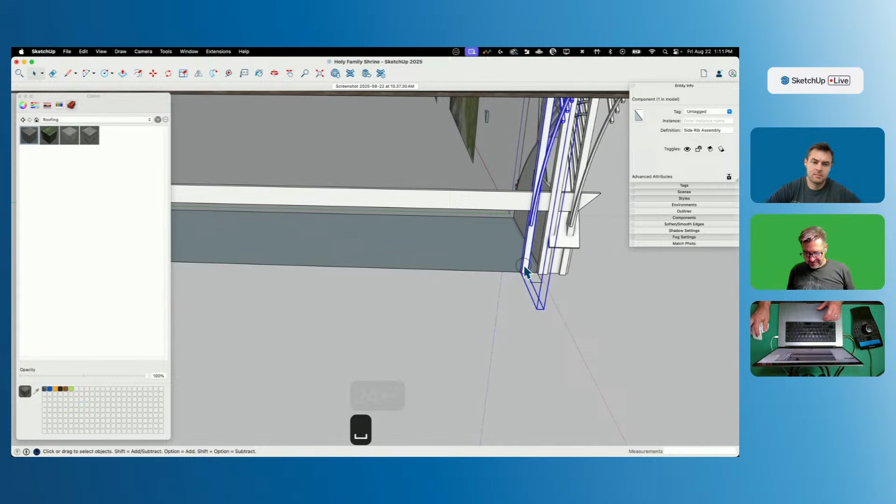All right, so I'm gonna bring that this way. And how many of these we got? We got 1, 2, 3, 4, 5, 6, 7, 8, 9, 10, 11, 12. Wow, 13's a big one on this. All right, so here, how am I gonna do this? Trying to think of, all right, so if I look at this dimension, that's about 2 feet. So if I come this way, if I move that out to 2 feet, and then down here, same thing, I make an edge right there at 2 feet, and then I grab this one, I say option copy it down to this point, divide that by 10.

Whoops. That gives me that many of those. 1, 2, 3, 4, 5, 6, 7, 8, 9, 10, 11. Okay. I put them inside the building for some reason, which is not what I want, but that's easy enough to fix. This way. Oops. Bringing the building with me. And then if we wanted to make this even, I could come this way. 24. And scoot this right there. Cool. Yeah, that's looking good.

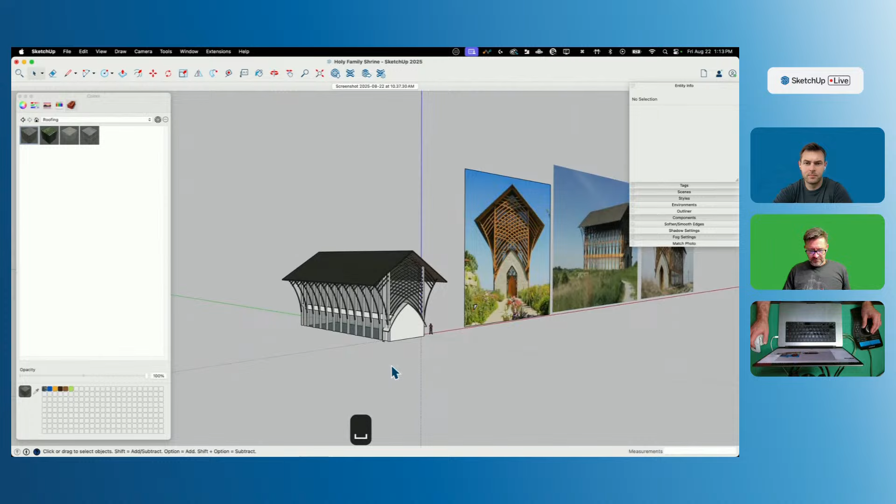There's a point you pass when you're working on a model where all of a sudden it seems to be a real thing, you know? Where you get to a spot where you're like, all right, we're doing it. This is it. And I feel like that was it. I think that putting these pieces on the side, all of a sudden now, I kind of believe that these are the same buildings.

Come in here. Grab that. And then scoot that this way. Toggle my model back on. All right, so I think the only other thing I really want to get in here on the side is, like I said, it looks like I got 2 of these, I don't know what you call them, purlins or casings for the window or something. They're much smaller running across, so I'll get those in there and then I'll make that into a component and copy it to the other side.

We're getting there. We are getting there. All right, just a couple side ribs and you're good to go. Side ribs. Write that down.

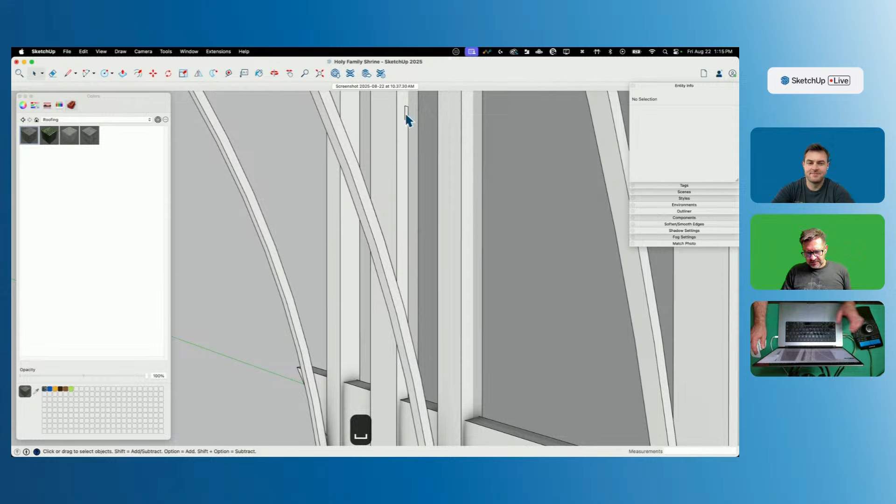Let's go from this intersection. We'll go up. How far is it all the way up? If I go all the way up, it is 25 feet. So if we go up 10 feet, let's say 10 foot. Just go up 10 inches. I didn't go up at all. All right, 10 foot. And then from there, we'll go up like, I don't know, 6 inches. Edge right here. Take this one, make a copy over to here, get rid of this in the middle.

Sometimes I mumble to myself as I model. It's a good time. I was wondering what was going on there.

All right, there we go. I'm gonna grab that and make a new component. Middle rib. There we go. And then I'll copy that vertically 10 feet. All right. And then I think for the level of detail we're going for, I think that's it for the side. So, well, I don't even know what's happening on the back anymore.

I don't know. There's stuff going on back there. Yeah, it looks like it's from the photos. It's missing. I think it's just a glass facade, essentially. Yeah, but I think we have this whole thing back there too, right? Yeah. Okay. So here's the thing.

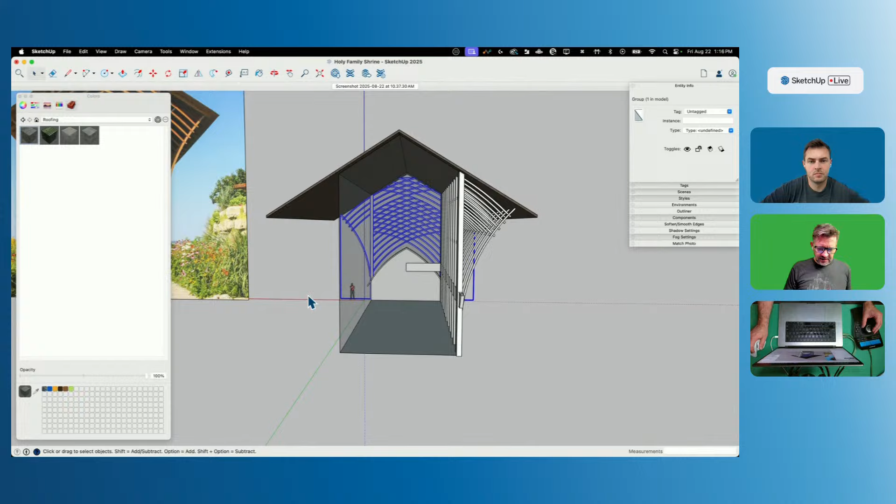If I grab all of this and I make it into a component and I stick it on the other side, then I'll have to do that again with the front and back with this. But if I grab all of this, plus the front, plus this, plus this beam, if I grab all of that, or if I deselect that after I grab it. Yeah, again, carefully select everything, then carefully deselect, and then do it again. And we'll call this a half order of ribs.

If I take that and rather than copy it, if I rotate it around the middle of this roof, give me this point right here, give me the middle. And I go option rotate.

I can't help but laugh about the half order of ribs. That's hilarious.

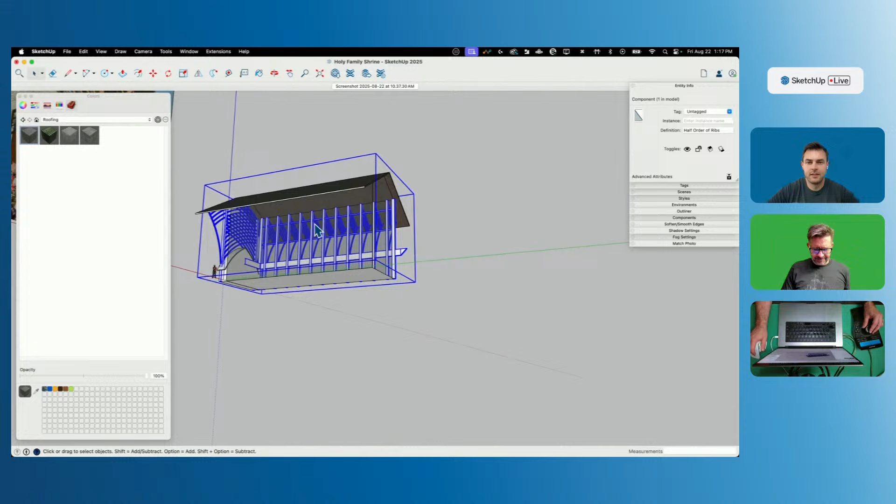All right, apparently my roof's not perfectly symmetrical, so undo. Let's try that right here. We'll find the middle of this. All right, we'll try that. Option rotate. Rotate around the middle. There we go. That's it. Nice. And there we go.

And now I can also hop in here and I can go, okay, grab this one, and this one should go from here up to the face of. Oh, help! I'm on the glass. Yeah, it's catching the glass. Nice. All right. This is a cool building. I like this. I like this a lot.

Let's throw some more materials in here. Let's go into some stuff. Yeah, it looks like a nice light wood. Let's see what we got for regular wood. I think we can use this laminate, which I'm not a huge fan of because it doesn't have really good definition, but I think that works okay for this one. So I'm going to put it on there like that, and then we're going to go back home. I'm going to double click it, and we're going to lighten it up. So I'm just going to take it and make it lighter. Yeah, there you go. There it is.

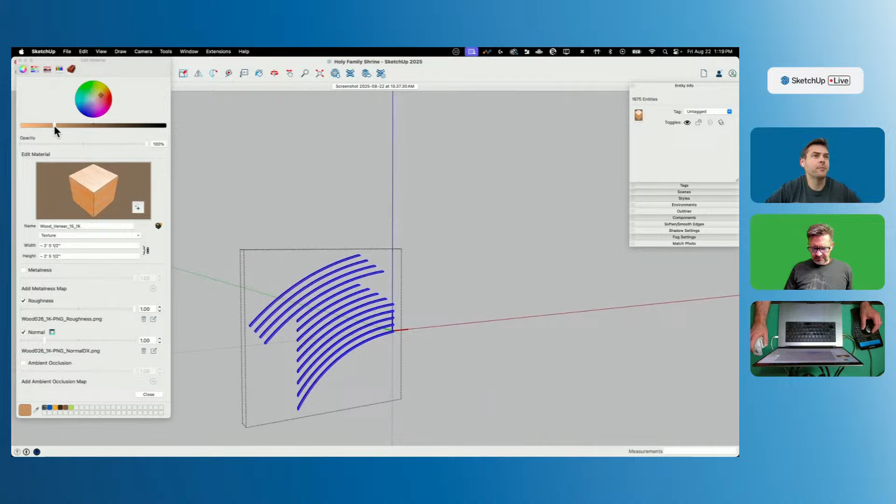Okay, so that works on both of those. I'll come into this, same thing. All right, that one I might have to fix because the grain's going the wrong direction. I know the grain's going the wrong direction on these angled pieces too, but this one's much more clearly not going to work. So I'll grab this texture, position, grab it, we'll rotate it 90 degrees. And then I can come in here, I can say all, sample here, and then paint that, and it'll get all the sides going the same direction. Beauty. Come in here. Nice.

Which, of course, is the wrong direction for this one. So I will have to go in here, texture, position, rotate that 90 degrees again, and we're good to go there. Now I can grab all of it, sample, fill. And that should work for this one too.

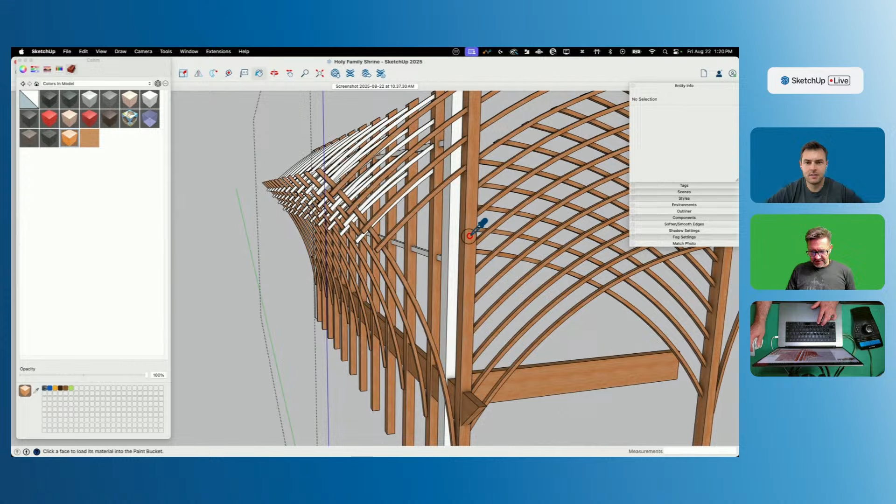This one right here. So I'm going to sample ahead of time. I'm going to sample the vertical texture I have. Come into this one, select all, fill it with that vertical texture. This one right here is horizontal, so I'll go grab this one. Come in here, all, fill it. I should get both of those up there. Perfect. We're getting there. Look, one piece at a time.

All right. These ones right here, I'll just sample off of this. Come in here. Come in here. All, fill. Nice. Oops.

Are you going to add an entrance? Yeah, I figure we got another, what, 20 something minutes left. Let's knock out this front entryway. Get rid of that. Don't forget to save. Okay. All right. So a couple things here. So first thing is, it looks like the face of the roof here is the same light material. So I'm gonna go ahead and sample this. Get that all wooded up.

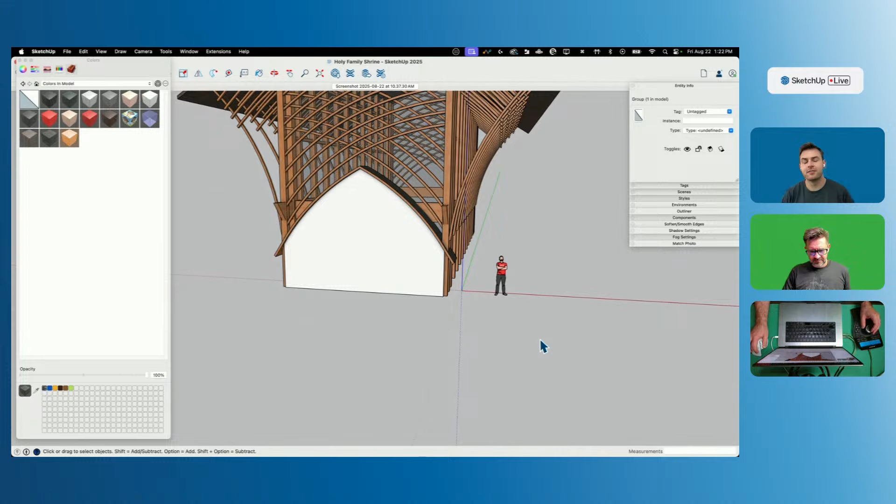Got a couple people in the comments here mentioning that they're wondering if you know that you can double right click on a material that's painted onto a surface and just quickly rotate that way. Yes, you can. Yeah, he knows.

But sometimes it's all in here. It's just not always in RAM. Sometimes it's in storage. It's on the disk drive, and I haven't accessed that. It's just not active. Well, to be fair, also, sometimes you're modeling in a way that's quicker when you're not showing other people. And in this case, it's nice to kind of go into the actual rotation.

All right. So let's spend some time making this happen right here. I think I'm going to do the same thing I did before. I'm going to come in here, turn everything back on. I have this face. I'm going to grab this material, drop it right here, and then texture, position. Shrink that down a bit. Oh, shrink it down too much. There we go. That should be about right. Again, just trying to get it about. No, that was not right. Right there.

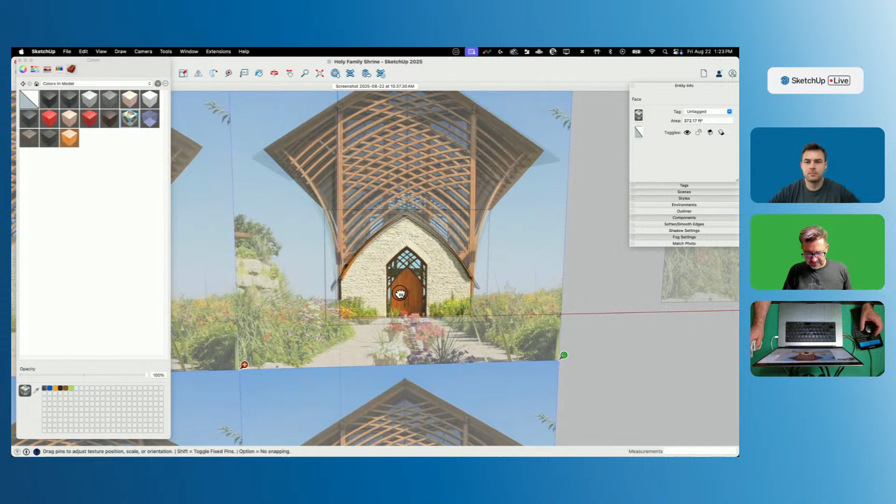The reason it's hard to resize stuff is because you're sizing the absolute corners. Oh, that's good. That'll work for what we're doing. All right. So I'm going to start by chopping this in half because I don't want to model this twice. I'll come over here, draw a line up, draw that like that. There's a little bit of an arc. Past that just a little bit. That, and then put an arc on here that comes up just a little like that. Oh yeah.

Okay. Now I'm literally just tracing geometry, and as I do this, I am deferring to the axes rather than the image. So I'm making sure that's snapping vertical rather than snapping at a slight angle, because that vertical is more important. That's what I need right here. All right, looks like there's one more vertical piece right here. Door frame. And then we got some arcs going. So my arcs can go from this point up to that.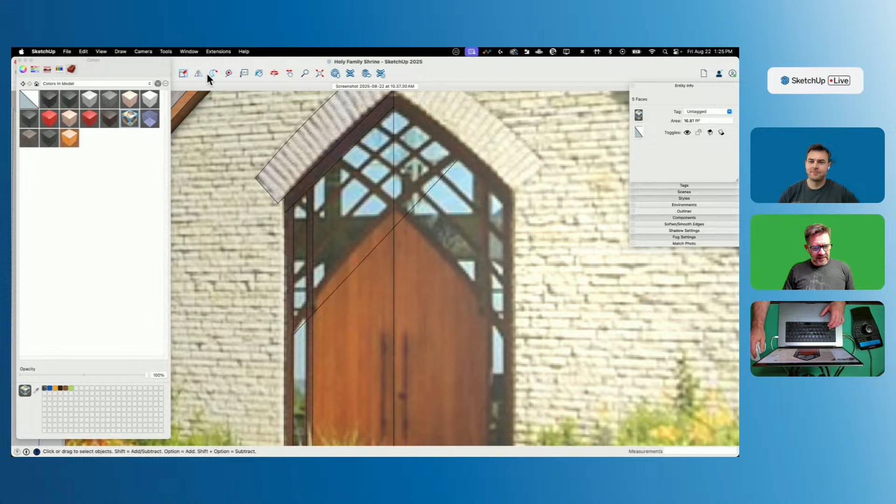Hold up. I'm trying to think how to do this now. All of a sudden, I talked myself out of everything I was doing. I'm going to grab all these pieces. I'm going to mirror them over. Yes, I am. All right, I'm going to cut that off there. Draw an arc then from the end of this to the end of this. My arc like that. I gotta get rid of this. I know I just drew this in, but I gotta cut it out. I gotta get all this in one. Offset that.

Two, three. All right. I'll offset that. Here. There we go. Offset this. No, hold up. Unselect. Be cool. Two.

A lot of whispering going on over there. Yeah. You're deep in the flow. Oh, it's happening, man. Stuff's going on.

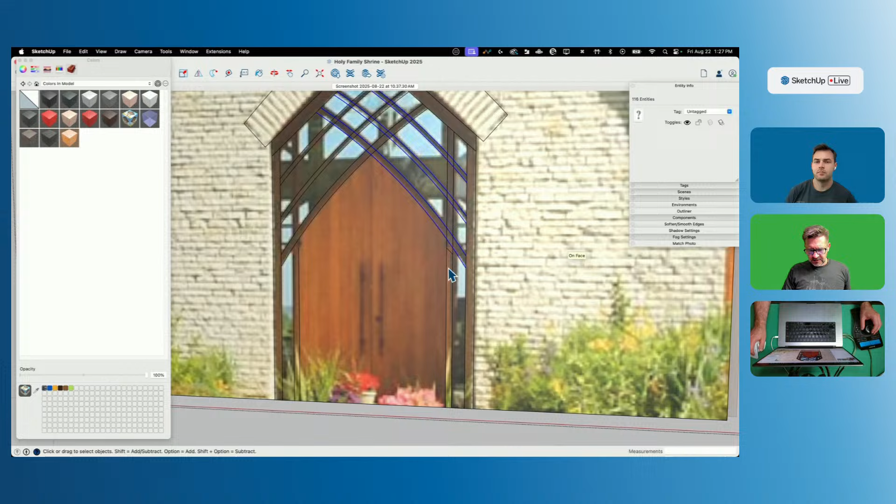All right. So what that got me, whoops, was these pieces right here. So what I can do now is I can grab each of these, 1, 2, 3. We'll mirror those. Again, option mirror right at the middle will get us all that geometry. Looking good. Awesome. Continue this back up. And now I just got to figure out, obviously very poor photo of the front door, so I got to assume a little bit, but I'm going to assume that this vertical, whoops, why didn't that cut?

This vertical piece runs through all the others up to the top like that. I'm going to assume this stuff all comes together somehow. It's magic fairy wood, so that's how it works.

Yeah, we're at the stage of the design here where we're just making a lot of assumptions based on very pixelated photos. That's right. Look what I'm designing from. What do you want from me?

Yeah, so this could happen. Somebody could take these pieces and cut them in such a way that they overlap. This is not... ridiculous. I'm not sure why that happened there.

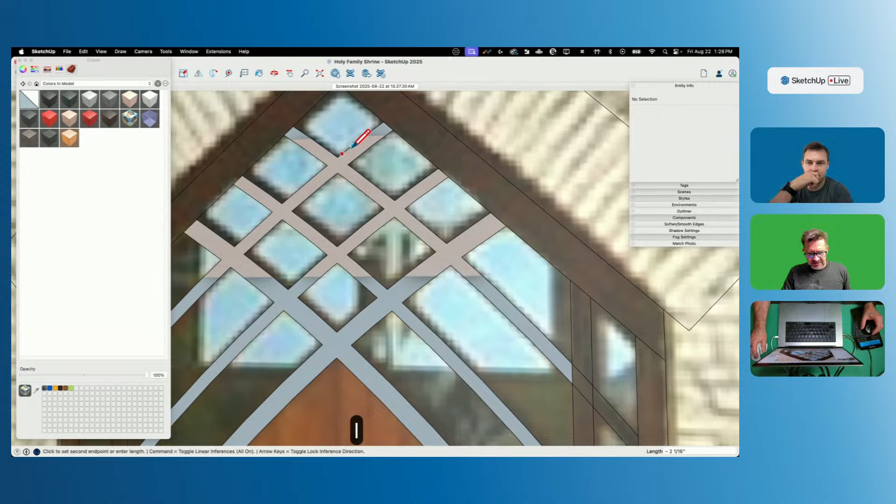All right, there we go. What's happening there is actually deleting the surface, and I'm seeing through the other side. And then I'm just closing the surface back up by putting another piece in there. Okay, so that's the piece there. This piece is here.

I had to hit the brakes. Yeah, I'm not sure why I keep having these issues where stuff's edges aren't getting broke. Oh, no, it's not because I copied it over. I don't know. All right, there we go.

And then in the middle, got a break where that door is, and then some handles happening. All right.

I'm going to now, we're going to come in here. We're going to give this some depth. So I think this is going to come out a little bit, these two pieces. Hold up, first, before we do that, those are all the important parts.

Yeah, I'm going to grab white. Whoops, I don't want it all over that, actually. I just want it on this. I want to keep my roof. I intentionally colored my roof area. I don't want to get rid of that yet. All right, there we go.

Now I'm going to come in and add materials. I'm going to add materials before I push pull, and that's intentional, because right now this right here is one surface, right? So I can add a material to it, put my dark wood material on there, and it'll be on there. If I pull this out first, now all of a sudden I've got to go into each of these little faces and add materials to it later. So like a coloring book, I want to color it while it's all just lines right now. That way when I pull out, it'll automatically assume those shapes or colors that I put on there.

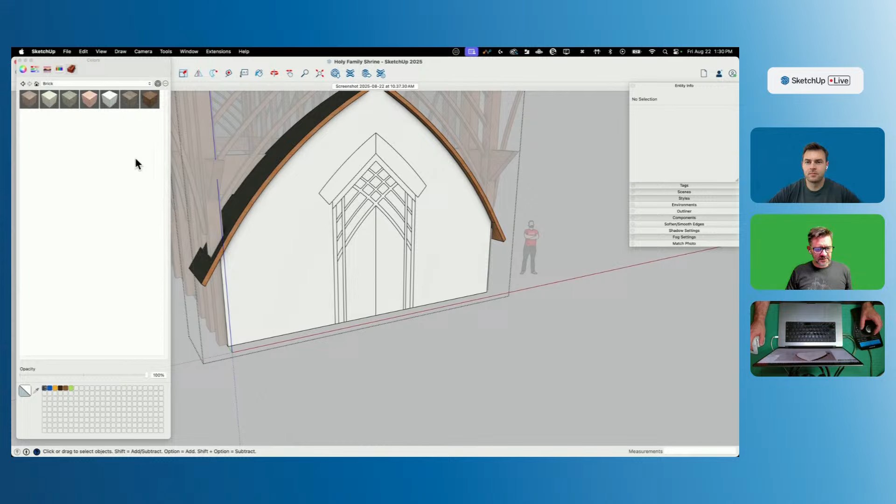So let's go find some brick first. Brick. Alphabetical order. I don't know what we got here. Let's try some stuff. Oh, that's awful clean.

I think you can pick any of those bricks and then just lighten up the color. That's nice. Yeah, I'm more looking at the shape of the bricks. It's a little more worn, but I think that'll work. All right, I'm gonna use that one.

On the sides as well. Let's throw it on the back here. And then what I'll do, again, just like I did before, I'm gonna come out here. Oh, I gotta purge. Hold up. There we go. Grab that, and then we'll just...

Really lighten that up. Not only do I want to make it lighter, but I also want to get away from this orangish tone, get it closer to white. So I'm just going to try to drag that sort of to the center there. That'll work. Nice. All right, so that's going to be there.

Now, here's the thing we got to do. We got to get that onto here. This is going to get crazy. I'm going to be honest with you guys. Buckle up. All right, what we're going to do...

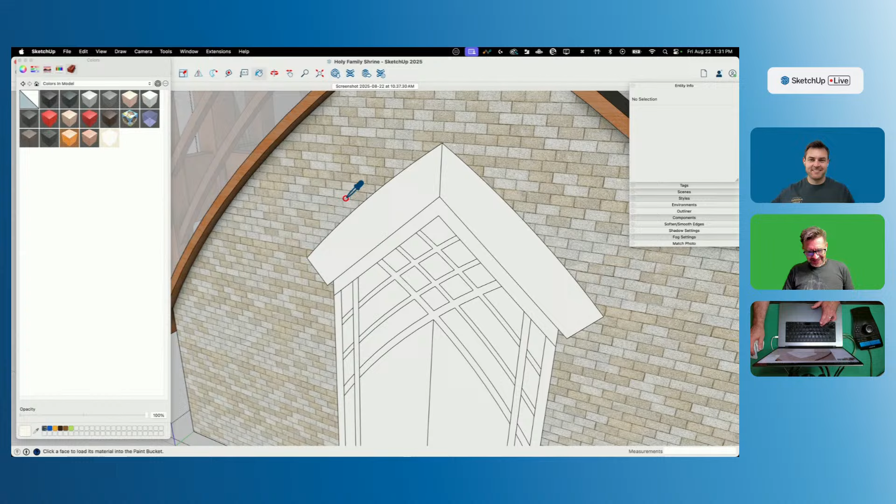Is I'm going to sample that same material and apply it to this face, but that's obviously not what I want. So I'm going to come in here, grab my material, just this face, texture position, and I'm going to rotate it so that the bricks are running 90 degrees to that section, just like that.

You're right, that was crazy. Oh, we're not even to the crazy part yet. That was the simple stuff.

Get ready, everybody. So the next thing I want to do is distort this a little bit more. So I'm going to do this: I'm going to turn off fixed pins, and I get these little push pins. I'm going to take this one, click it to pick it up, and go just inside.

Let's do it at this end because we can, just inside that little mortar line. This one right here, I'm going to grab and put just inside, right here, but straight down, about there. On this end, pick it up. I'm going to follow that line, be just inside this one right here. And then you will come over here and be just inside that.

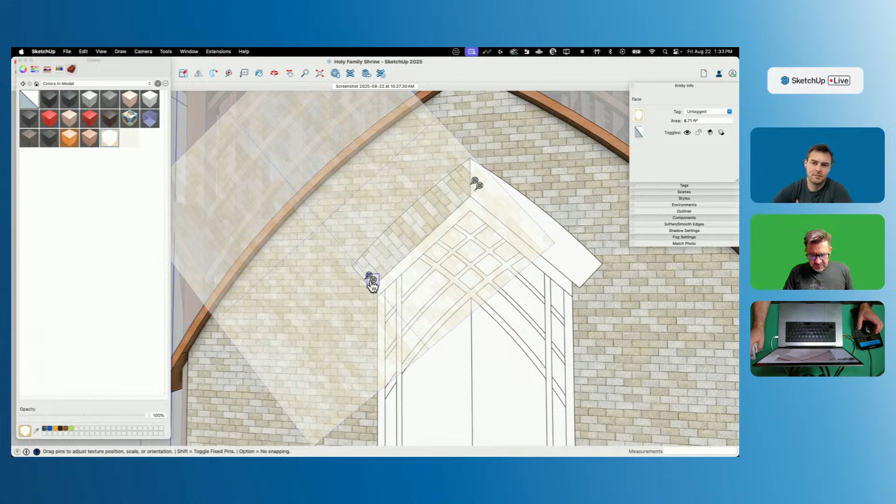So what I basically did was I grabbed these pins and shoved them in there. And now what I can do is distort and pull this like this, pull it like this, pull this one up here like this. Oh wow, all right, so we gotta go a little bit further out to get rid of those lines on the end.

And there we go, with that same material, nice, we got that. Again, we're doing this whole thing in an hour and 45 minutes, so we're definitely taking some liberties with this stuff, but this is using that same material. I'm not trying to cut anything out of this low quality brick here, I'm not trying to download or take high-res pictures and bring them in. This is just quick and easy with the existing materials.

I'm wondering if I grab this right now, I honestly don't know what's going to happen. If I mirror that, will that mirror the material over? Nice, I like it when stuff goes easy. That's pretty sweet, yeah, so there we go. Like I said, quick and easy, but we got that same brick look from that one texture.

All right, I think what I'm going to do is pull this material out just a little bit, so I want a little bit of a recess there, but I want my brick on it. And then I'll pull this one up, and then we'll just make that just slightly proud of the main brick. Beauty. All right, then these two pieces I think are going to be on the outside.

Let's get some material on there. They are, I can't tell if that's shadow or if they're actually darker wood. Whoa, look how far in that door is. Oh man, yeah, it does look like it's supposed to be the same color wood, it's just in the shadow. Yeah, look down there, we got a little sun on it.

That's what it's saying, okay, so that's cool. But this all goes way back. Should have done this before I broke this up into so many pieces.

So what I can do, let's do a group select like this. And then I'm just worried about the faces, I'm not really too worried about the edges, they'll come along for the ride if I have the full face selected. I'll make sure I don't have anything on the bottom selected, so I'm going to deselect that. Make sure everything on the back is selected. Nope. So now I should be able to just grab this and move it straight back.

There you go. Nice, oh yeah, look at that brick. This will need some work. I think if I grab this, put it there. Oh yeah, nice, that'll work. All right, and now I'm going to grab the same wood that's on here, put that on my vertical members.

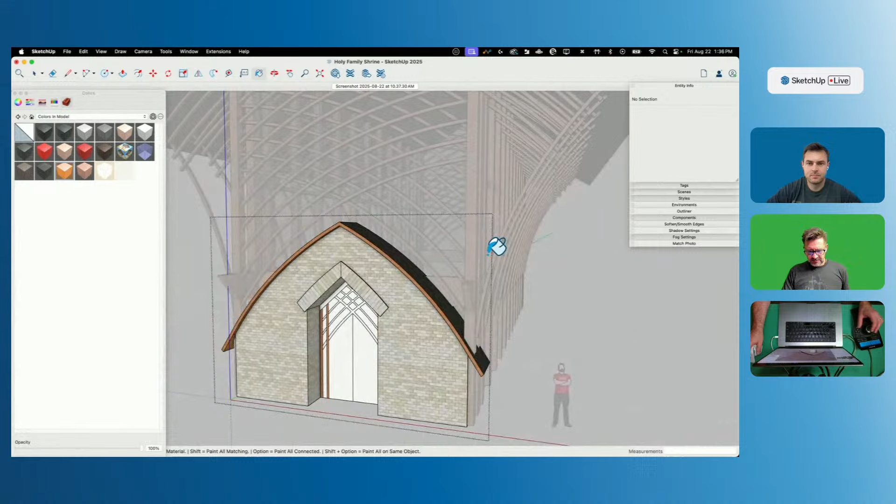Looks like the door itself is the same wood too, and then all the other openings are glass. So you can probably just select the same material, white, and then just glass. Yeah, there you go. It seems monotonous clicking on each of these pieces, but it's so much easier to do this flat because we're about to make a mess.

All right, so now I'm going to take these structural pieces, these bigger guys, they're going to come out here about that much. I'm going to your standard 4 inches, could be, I ballparked it, I'll be honest. When I do this, if at all possible, I like getting this little bit of change in depth, because that way, even if I turn my edges off, I still have a little bit of an overlap there. And I think that just makes it look a little bit nicer, a little bit cleaner to have that.

And then this one, I want to pull out not quite as far. Same with these guys, these guys will all come out the same amount.

And to get rid of the stray edges there, would you use the cleanup extension? Grab a bunch of stuff right there, go to Extensions, Cleanup, Merge Faces, and then Extensions, Cleanup, Erase Stray Edges.

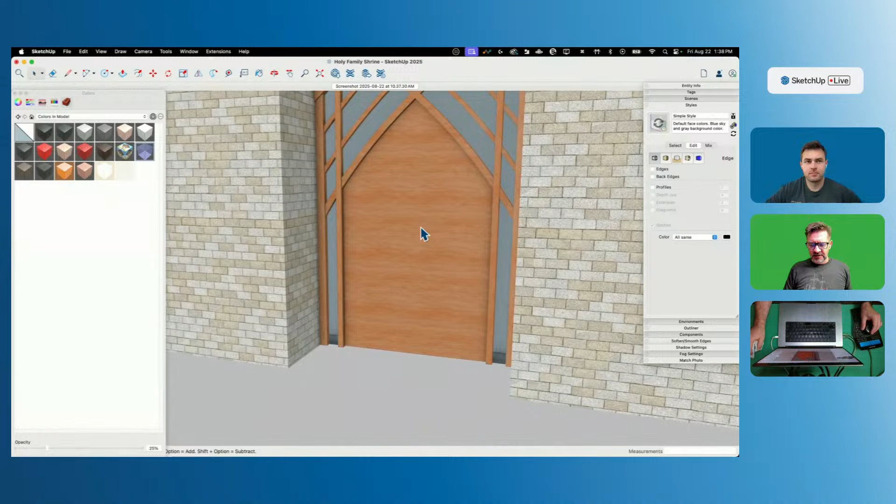That should get rid of all that extra stuff. So what I was talking about is, if I come up to my styles and turn my edges off, because I have those offsets there, I can still see that the ambient occlusion makes it look like those are separate pieces. If they were all pushed together, it would look like it was all cut out of one chunk of wood. That's not as good.

All right, so on this door, I'm gonna run it the right way. So that offset's kind of nice. With this door, if I want to make it look like two separate pieces rather than one big panel, I can do something similar. I'm going to find the middle here, draw a line straight down, and then go from here to here, maybe like a quarter inch.

I'm just going to drag that line straight up till it hits the top up here. I can mirror that over—big fan of mirror. Get rid of the middle one, and I can take that and push it in a little bit.

So that's a half inch gap. It's maybe a little bigger than it would really be in real life, but again, if I turn the edges off, I'll be able to see that as two separate doors rather than one solid piece.

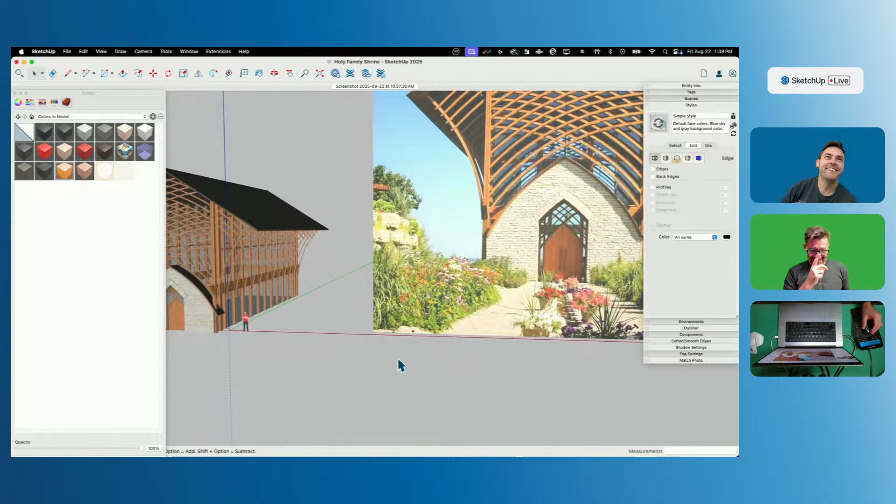Nice, that's looking pretty cool. I like that building, that is a fun road trip. What do you say, next week we'll be live on I-80, Nebraska? Yeah, very limited service, from the hotspot. Yeah, that is pretty cool.

Yeah, I think that looks awesome. I think I'm gonna do this—I'm gonna go change the color of my edges to something a little lighter. Not that light, that's too light. Oh yeah, looks pretty cool. Nice, let's do this as well.

There's so much, it's so hard to see inside. I don't really want to mess with trying to do anything inside, so I'm trying to make this shell look as cool as I can make it look.

So let's do that, maybe throw in an environment. Let's grab all of these—I'm not going to delete them, but let's make this back into a group. Grab all of these and we'll just hide them temporarily. Temporary forever kind of thing. Yeah, let's turn on environments, we'll start there, let's turn it all on. Give me all of it.

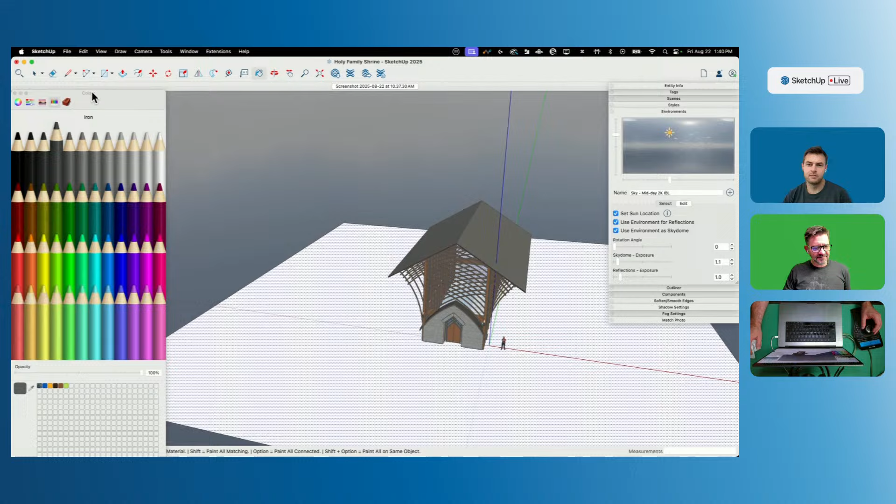All right, I'm not a big fan of this. What I'd rather have is cast a shadow onto that. And then with this, we'll go—do they have sun-scorched grass as an option here in my ground cover? Sun-scorched grass. Oh boy. All right, there we go, that's not far off. Okay.

Yeah, so let's make that better. Close that—I don't think we're in the right environment. Also, I'm gonna hop in here and give my floor just a little bit of depth, not a lot, but enough so I get rid of that Z-fighting.

I'm also gonna throw a material on here—I'm gonna just call it, let's go find some like a nice cement. Yeah, that'll work. That's too close to the ground color. Okay, that's better, cool.

That looks pretty nice. We don't need Mr. Scale here anymore, right, let's close that. Yeah, that looks pretty good, but I don't love that environment, I want something a little more—looks like there's a lot of shrubs and vegetation in the back, so yeah, that style there might be perfect. Look at that, we're in Nebraska, folks.

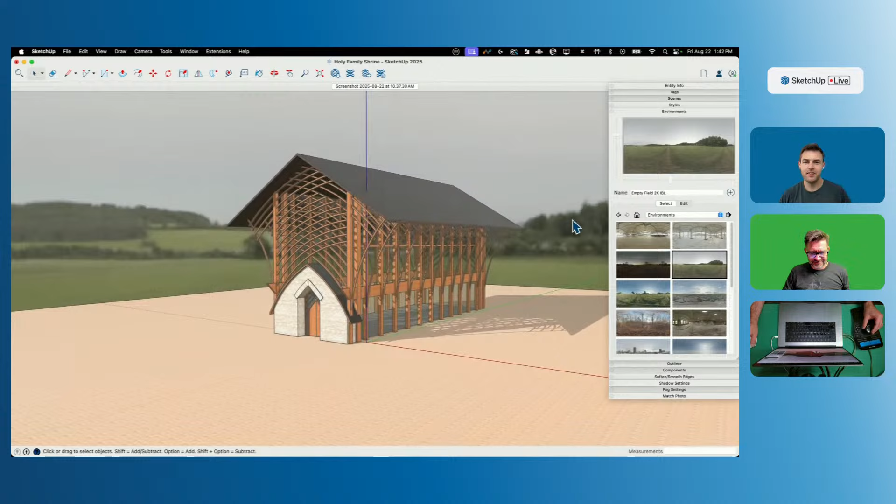That's right, that's pretty cool. Yeah, just turn off your axes and I think that's it, we're there. That turned out pretty cool, love it, I love it. Save it, great, Command S.

Awesome, well hey, I think that was a pretty good effort—what, an hour and a half model? I think that turned out pretty sweet. It is fun to do these.

One of the limitations we have of course is we try to say let's do about 2 hours here, just because it's exhausting to do this for more than that. We used to do 4-hour streams, that was back in the day, but we don't anymore, and I'm assuming there was a good reason we stopped doing that.

But with that 2-hour time limit does come limitations of what we do, so I was intentionally a little brief on some of the details. I don't know how any of this wood connects, I don't know how we basically have this gigantic monolithic pane of glass right here—that's probably not really what's happening.

We have groups lapping through groups, and I just kind of left it. Not saying any of this is wrong, but this is a way of modeling where we get something that looks good in a shorter amount of time. So hopefully you guys saw that and took something out of that. This could be taken as step one, and one could go back afterwards and flesh out the details